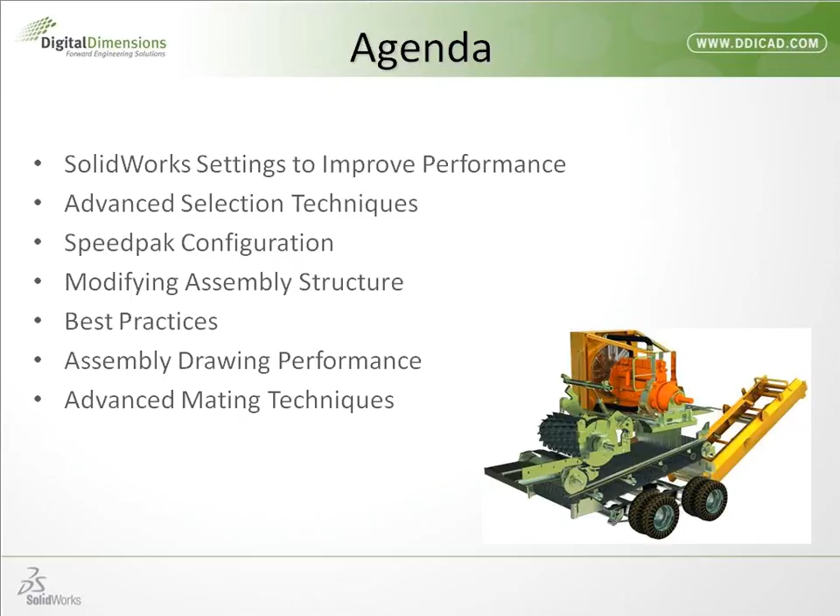So the first thing to kind of have a disclaimer is some of the strategy, some of the things that you're going to see here today are going to work in your environment. Some might not work so well. So it's going to be a combination of settings and some of the techniques I'm going to show you. Some of the stuff like simplified reps, you might have to do some upfront planning and work that out with everybody that's involved here. And one thing is that there's no silver bullet. There's no way to have one thing work for everybody in everybody's environment.

So I'll go ahead and get started with first off going into settings. So settings, some of these might be familiar to you. Some of them might be things that you haven't tried before. The big one is turning on the ability to have lightweight components as part of your assembly. Or another big one is large assembly mode, and then I'll follow up here with the image quality.

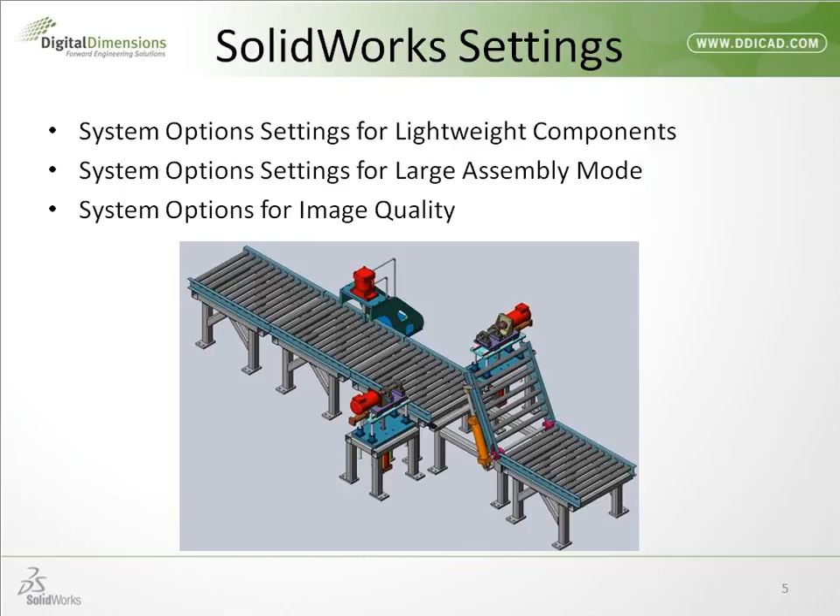So let's first talk about lightweight components. So lightweight components are a way to speed up rebuild time and also speed up the load time when you first open up an assembly. Everybody has different ideas of what a large assembly is, but if you load up something with a couple hundred parts versus a couple thousand parts, using lightweight components might make a big difference.

Lightweight components can be brought up two ways. You can change something in the settings, or you can just select something directly when you go into the File Open dialog box. And I show here on the slide under System Options, Performance is where you can turn on that automatically load components lightweight.

Now the lightweight components do show up with an icon showing a little blue feather, and you might see a red feather once in a while. It means something's out of date, but a blue feather means something's in lightweight mode, which means it's going to have all the capability that you're used to, except you can see on the bottom of this slide it says things cannot be edited, or it does not show the features in the feature tree when you first bring it up in lightweight. That doesn't mean that you can't just click on the part and then start to actually edit it. So let me go ahead and show you that.

So two ways to bring up lightweight components. I'm going to start with opening something that's in one of our classes here. It's a scuba breathing mechanism. So here if I single click on this air source, one thing you can see on the bottom of my screen here is the lightweight button. So I'll go ahead and use lightweight, and I'll go ahead and say open, and I haven't set the settings up in my options, so this way I'm just directly picking lightweight.

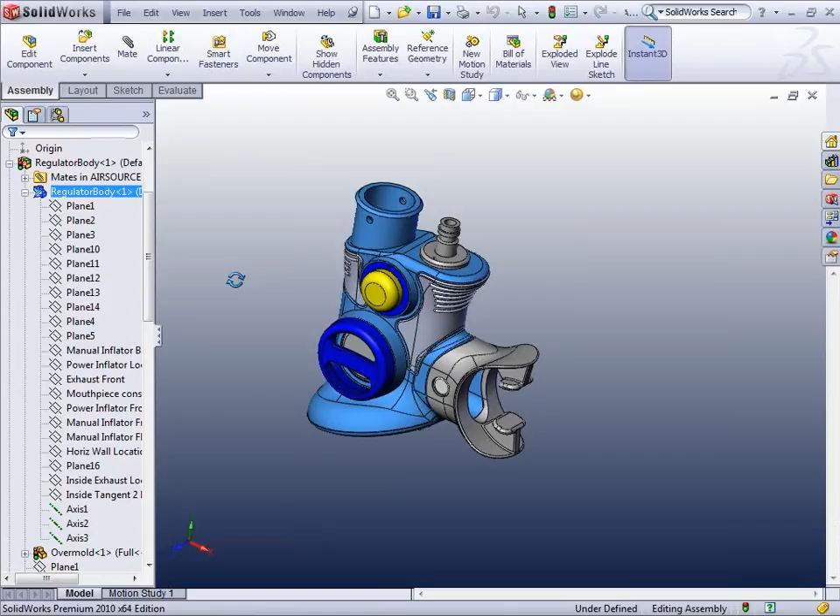The second I double click on this to attempt to modify it, all of a sudden it switches over from lightweight. It adds more data to memory, so it adds information as it needs it. So you can see now my feature tree comes back. So lightweight is a way to speed up the loading process and also the rebuild process, so it'll rebuild quicker because it doesn't have to resolve all of the features that are in that particular part. So again, you can see the blue and you see those feathers.

Now, the opposite of lightweight is resolved. So how you can resolve all these, if you had to get all that information, is I right click here and I can say set lightweight to resolved. So when I click on this, it's going to take a little time; it might need to rebuild, like it just said. And also it's going to create the feature tree and put all the features in for each individual part in here, so I can expand them out now.

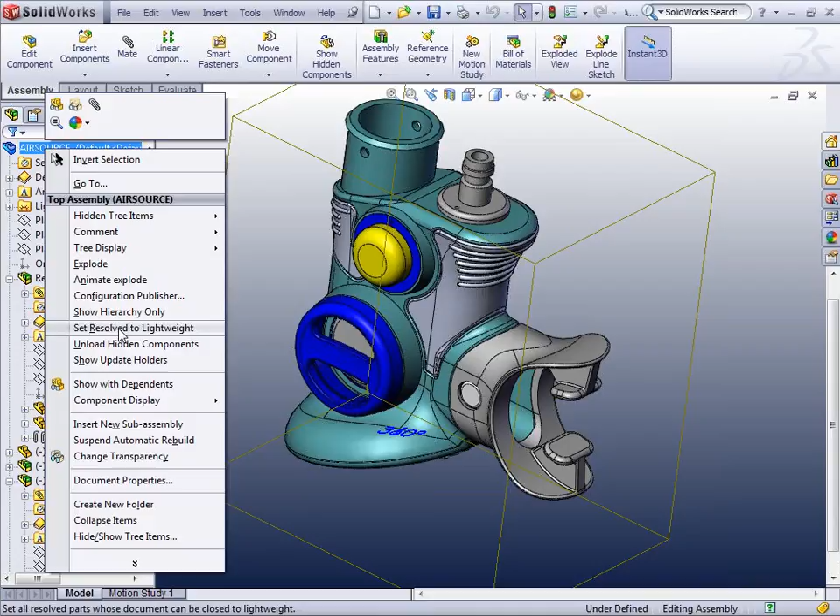And again, if you wanted to go back the other way, you can go in here and say set resolved to lightweight. So there's 4 ways a part can be in SolidWorks, 4 different states. It could be resolved. Fully resolved is the opposite of lightweight. It can also be hidden, or it can be suppressed. So those are the 4 different states.

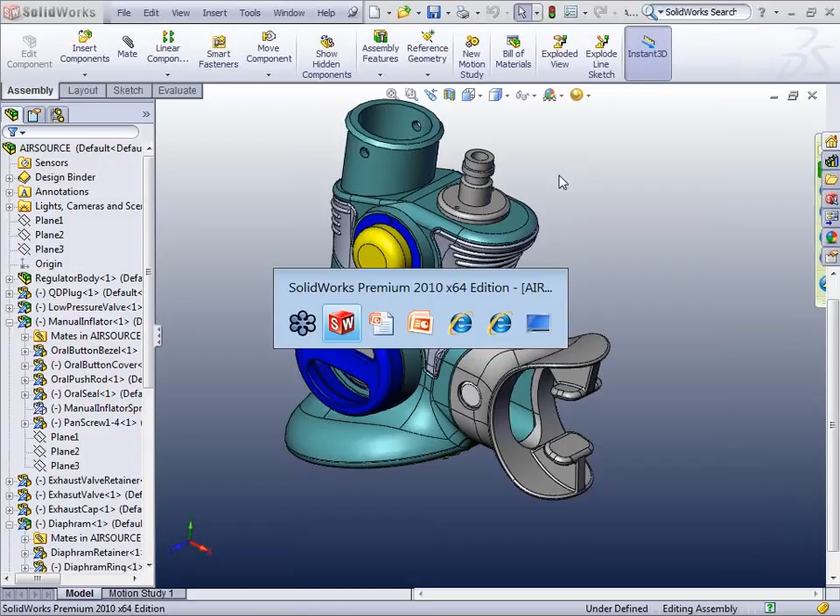So in this case, I just made those all back to lightweight. So it does speed up rebuild time. It does speed up load time. Let me go ahead and show you that again. Now the other way to bring up lightweight components is by setting it under the system options. So here's system options, performance, automatically load components lightweight. So let me show you that.

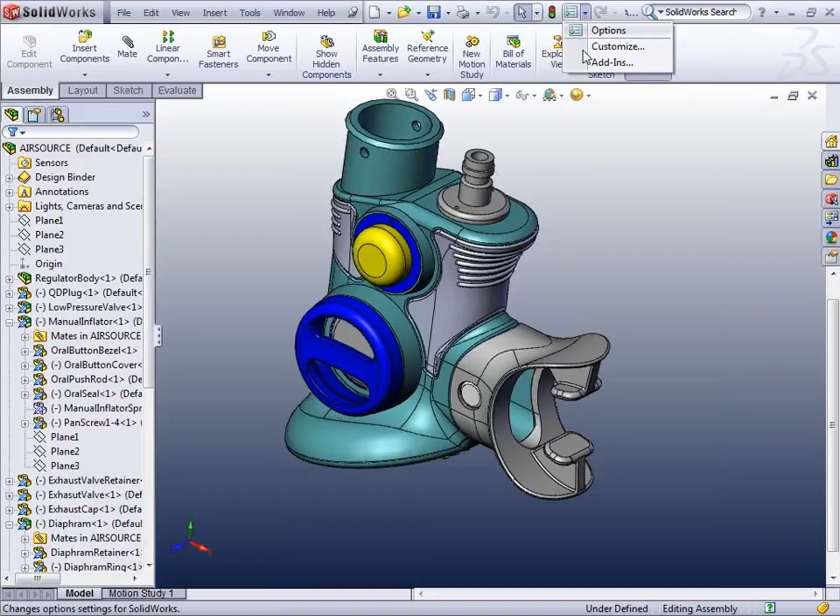So under tools, options is one way to get to it, or some of you might be familiar with, right next to the rebuild button, is options here too. So if I go into tools, options, system options, performance, here is automatically load components lightweight. So there's lots of settings here. The one that you want to also be aware of is you want to leave this always resolve sub-assemblies checked off. There's some other settings like check if things are out of date.

Here, resolve lightweight components. And usually here, rebuild on assembly, rebuild on load. This is something that you may have to try out, but if you know you don't want to rebuild when it first loads up, then you can always set that here too. Lots of different settings, and we'll just focus in on this one for here. So automatically load components lightweight. So I'm going to go ahead and say OK.

Now I go ahead and bring up this assembly again. What I'll see is when I go to open, the second I pick on here, that lightweight button is checked off. The other way I can tell is that if I already had opened this up once and I just double click on it, it's going to try to bring it up in lightweight mode here. So we'll let it load up. So you can see that in this case that setting was automatically turned on. So lightweight again saves you rebuild time, saves you load time. So that's one of the things I wanted to point out to you.

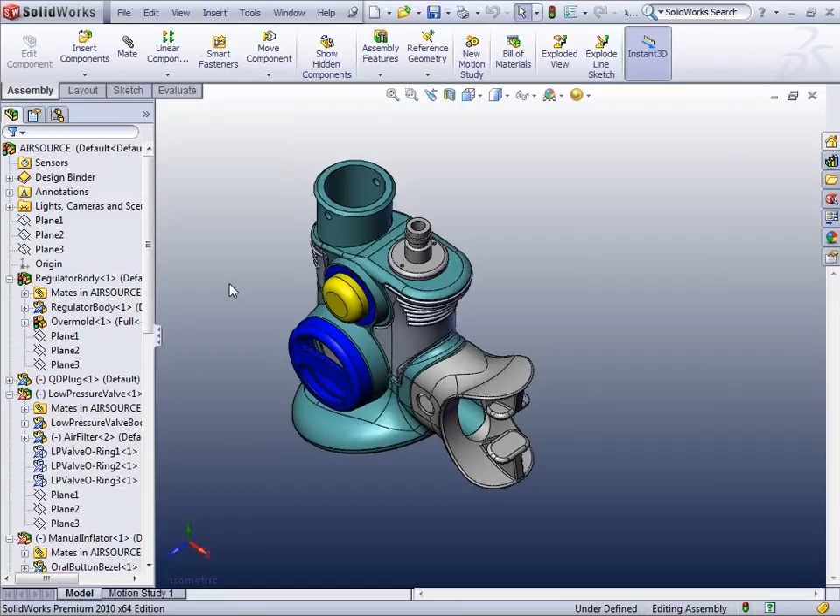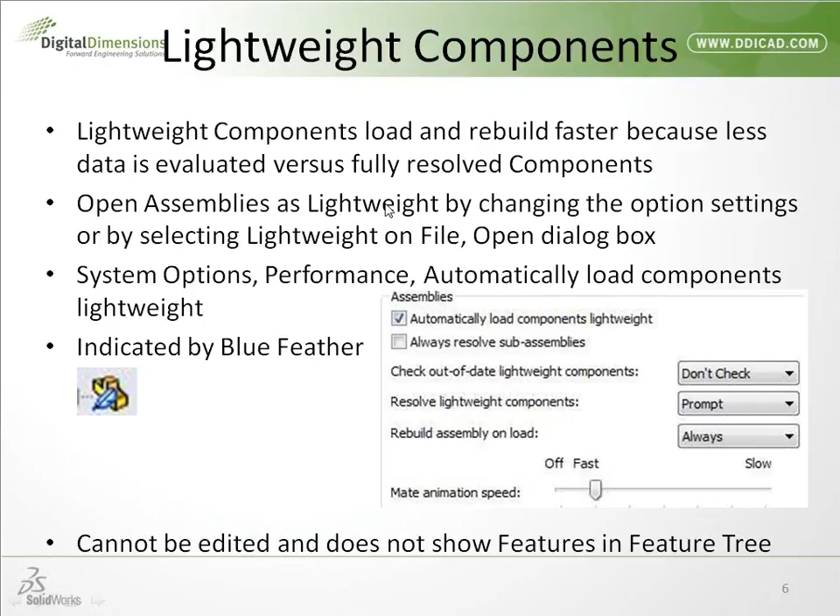So I'm going to go ahead and go back to the slides. Okay, so that was lightweight components. Now I'm going to show you another setting that has to do with some display options, but also has to do with things like auto recovery. The first thing is you can invoke large assembly mode manually. You can manually toggle a button, and I'll show you that.

But you also have the ability to determine if large assembly mode starts up by a default threshold. In this case, the default is 500. We can set this to less in our case, so I can show you some examples. So you have 4 options. You have, if you want the large assembly mode to save an auto recover info file, which a lot of people probably don't have a lot of success using auto recover, so that probably wouldn't be a big deal.

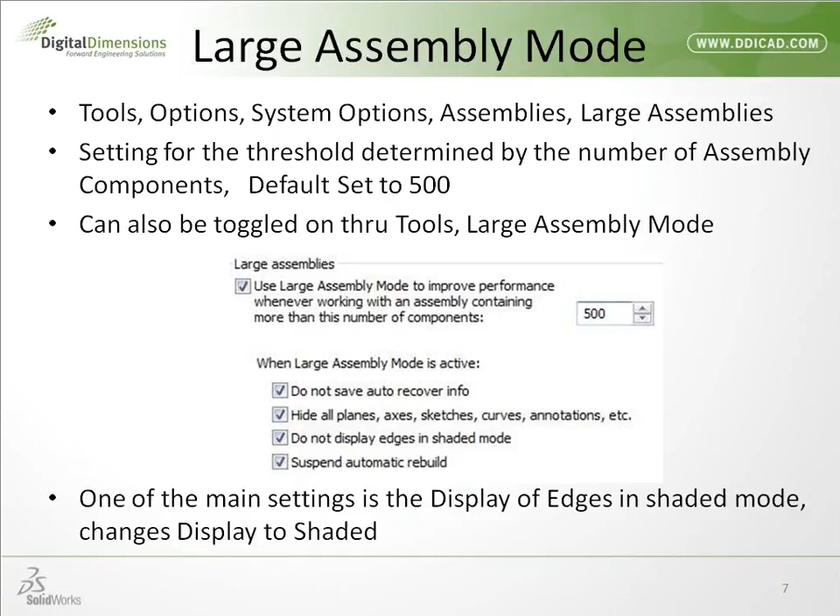Before I go back to SolidWorks, let me just explain that again. So the display style does affect the performance. Shaded is the fastest display mode in SolidWorks. And once again, large assembly mode will push it over to shaded versus shaded with edges. Hidden line visible is the slowest display style. And display style performance also applies to assembly drawings. If I have a little bit of time at the end, I'll show you that. So let's go over large assembly mode next.

So I'll go ahead and I'll close this one out. Now, under Tools, Options, how you turn on large assembly mode is you go underneath Performance; the next one down is Assemblies. And you can see that here is large assembly mode. Now I had triggered this to be, in this case, 3 components, which is a little bit too low of a threshold. So this is going to set, if it's a 501 part assembly, then it turns on this large assembly mode automatically.

Too high so it doesn't invoke it. So you can see all these settings are configurable. The 2 big ones that you'll see right off the bat are these ones for display and showing all the planes and axis and stuff like that. So in this case, I'm going to turn them all on. And this is something that you can experiment with. Once again, some of these things you may not be able to live with, so you might have a combination of these 2 or 4. So I'll go ahead and say OK.

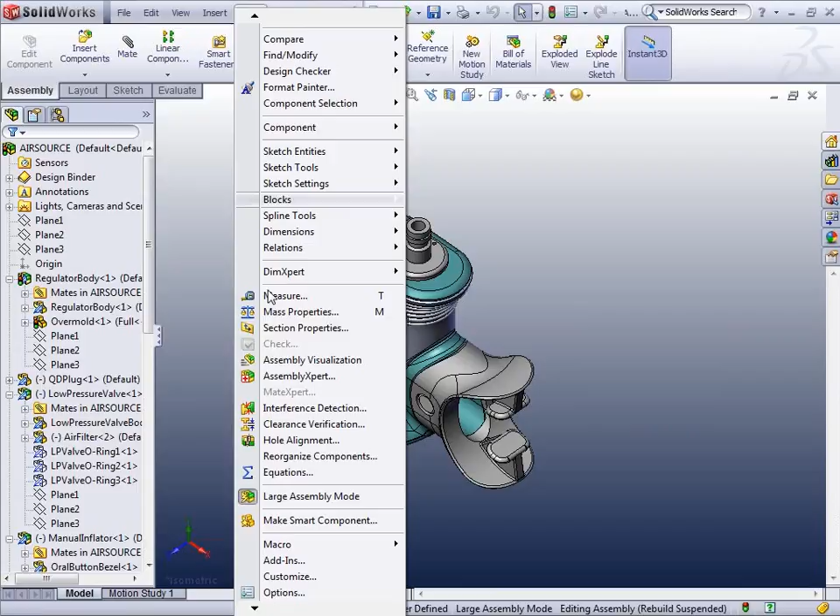with large assembly mode. So I'm going to go ahead and say open, and now it's going to invoke this large assembly mode. It will help to speed up some of the process. Here under Tools, you can see that large assembly button was pushed in. So you can see when that large assembly button is turned on, the biggest thing you'll notice is that shaded goes, and I just forced it.

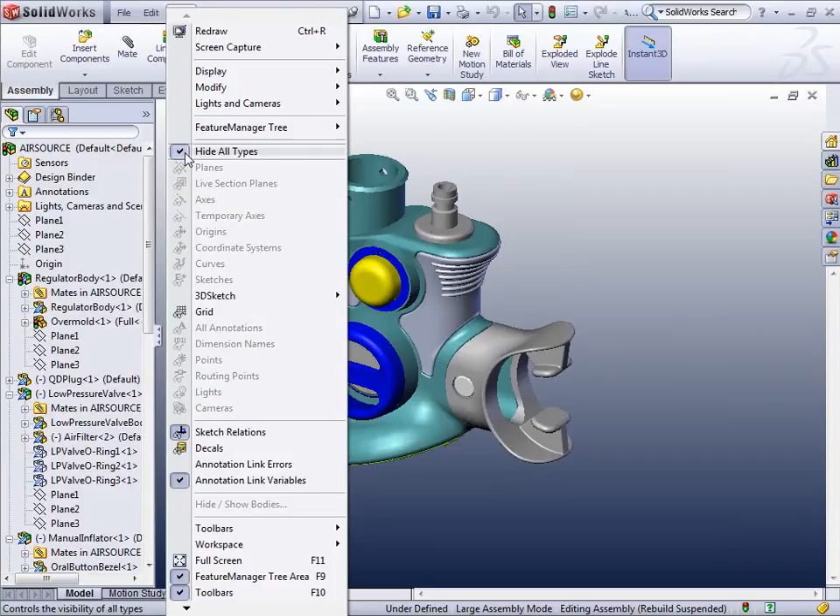So here, when I go large assembly mode, you can see the shaded edges go away and it goes to shaded. And then the other thing you'll notice right away is that hide all types is checked here. It says basically all these are closed and the hide all types is checked. So you can toggle in and out of this mode here directly. Tools, large assembly mode. You can see you can toggle that on. So you can come in here and you can turn back on things like your planes and whatever you need to do here. And you can go to different display styles.

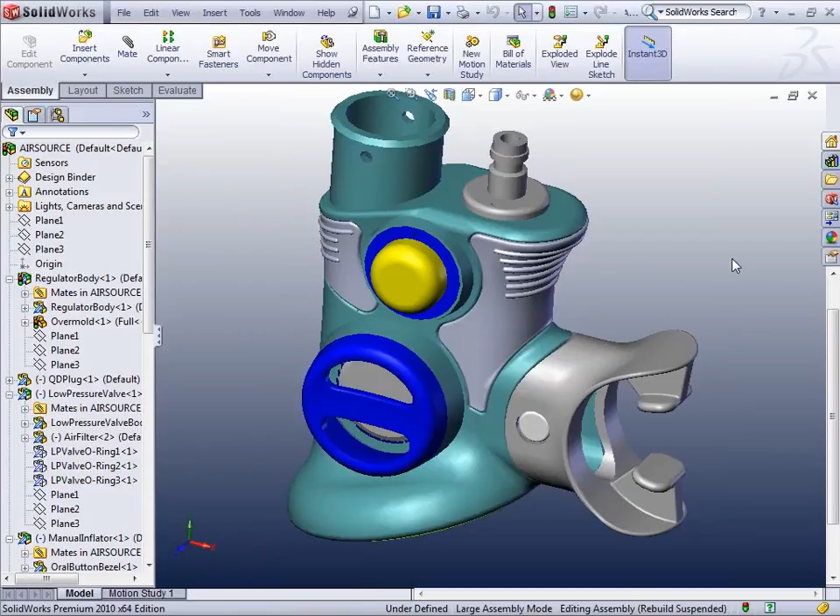And then if you wanted to turn that back on, these are quick fixes here. These are things that you can do right away. And this might be good enough for you to bring up a big assembly on a computer that doesn't have a lot of RAM or a lot of resources. So that's one of the other things I wanted to show you there. Now let's go ahead and move on. So I'll go back to my slides.

So again, this is going to be under Tools, Options, and now I'm going to go into, in this case, Document Properties, and here's Image Quality. Now, sometimes when people go into here, this thing is grayed out and they can't move it around, and we get calls on that. Now you go ahead and say Apply to all referenced part documents. So anything that's open is going to have this affected.

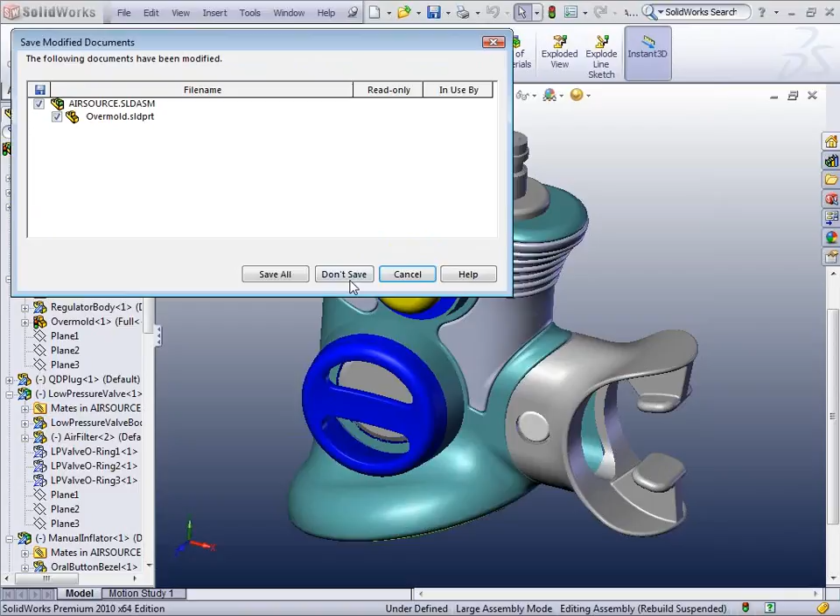So what I'm going to do next is I'm going to open up a different assembly now. And this assembly is one from one of our training courses, in this case Advanced Assembly Modeling. And so this is a barbecue assembly. Now what you want to know is that you can see all these settings down here, and there's all these options that most people don't pay attention to, and this is a pretty powerful one.

Here is Quick View Selective Open, and so once I click on this, it's going to show my assembly very quickly. It doesn't actually load it all the way into RAM. So it goes in here and it opens this thing up very fast, but it's a little deceptive. It's actually not fully loaded in RAM, which is okay because I can at least look at it.

Now, sometimes people use this if they have trouble bringing up an assembly, either because of resources or the assembly doesn't come up. So you can actually bring this up and suppress things enough to where the assembly still comes up. So here you have two options: selected components, and you also have all components displayed. Now this is really cool because if I click on this, I can see all components displayed. I have all this stuff open right now.

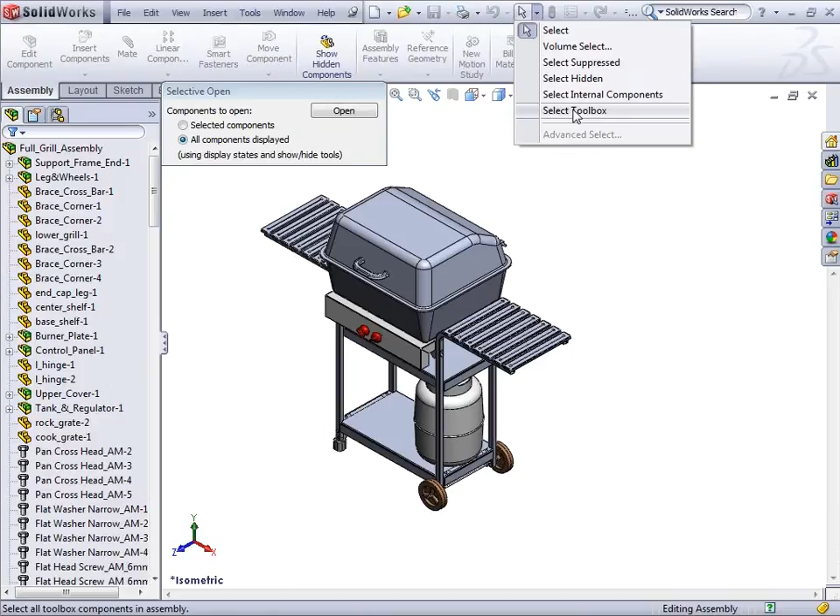But here is something called the Advanced Select. Most people probably don't use this button up here. It's right next to the rebuild. If I click on this, in this case, I'm going to select the toolbox parts, and it's going to find the toolbox parts, and you can see they're highlighting in green on my screen. I can go ahead and right click, hide those components. Now I just hid those.

I still haven't opened this assembly up in RAM yet, so now I can say open everything that is displayed. So that means in this case, turn off all these fasteners and only show me the main part of the assembly minus the fasteners. So go ahead and say open.

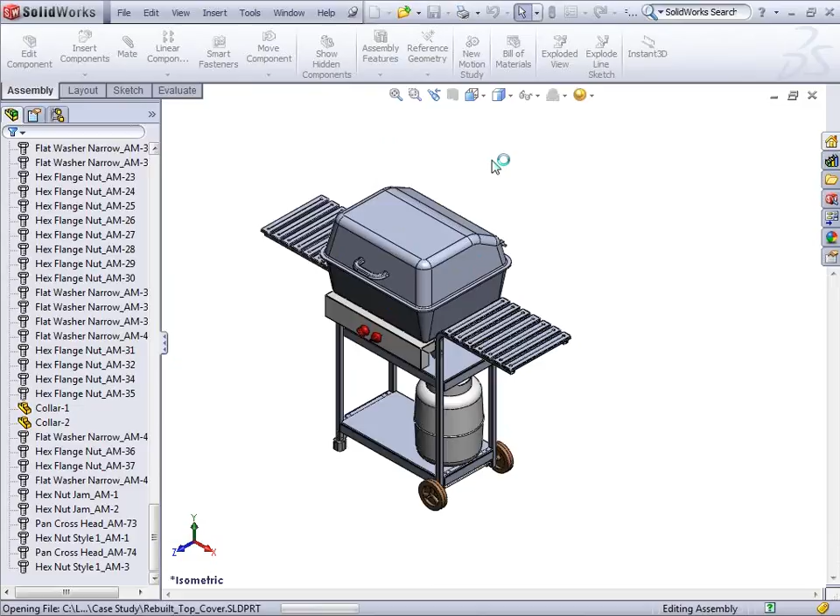And so you'll see it's going to open up basically a subset of my assembly minus the fasteners. It's asking me here, in this case it's telling me you have some hidden components. There's going to be a delay when you first try to show those components.

It's just a warning, giving me a heads up. So now what happened here is the assembly has all these components, in this case the fasteners, hidden. Let me show you what it did - it made a new display state. I'm going to toggle back and forth between the assembly to get the display states to wake up here, since they sometimes don't show.

So here you can see the components, I'll zoom in here again. So you can see I have a display state down here, and I'm going to rename this one. I'm going to call it 'no hardware' - no hardware, no fasteners, something like that that makes sense.

So now it created a display state, which you can see I'm in the configuration tab. This is a graphical configuration, a quick way to explain display states. So in this case, you're not suppressing components, you're actually hiding them.

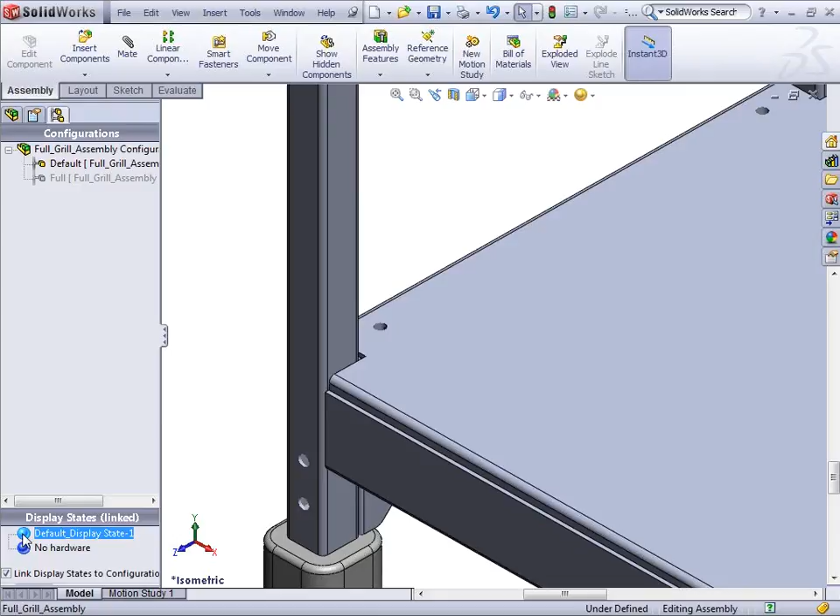So here is the default display state, so you can see those fasteners, and then here is the no hardware display state - that automatically created that. Here you can see the fasteners again when I go to that display state. So this is a quick way to show these fasteners on and off, and a quick way to actually bring up your assembly without having to load up the whole thing.

So again, where that was is it was under open, and here is quick view here. So now the next step is going to be...

Slides here. So the next thing I'm going to show you is Speedpak. I'm going to show you a Speedpak configuration. Speedpak configurations are new for 2009. They added a little bit more functionality in 2010. A Speedpak configuration is a special configuration which you can think of as a simplified version.

In this case I'm going to show you an assembly. It's going to still maintain its references, so if you mated things to it, the mates don't get broken, you don't get errors and warnings on your mates. And you have two ways you can simplify these configurations, either by face or by bodies, to include or to leave out.

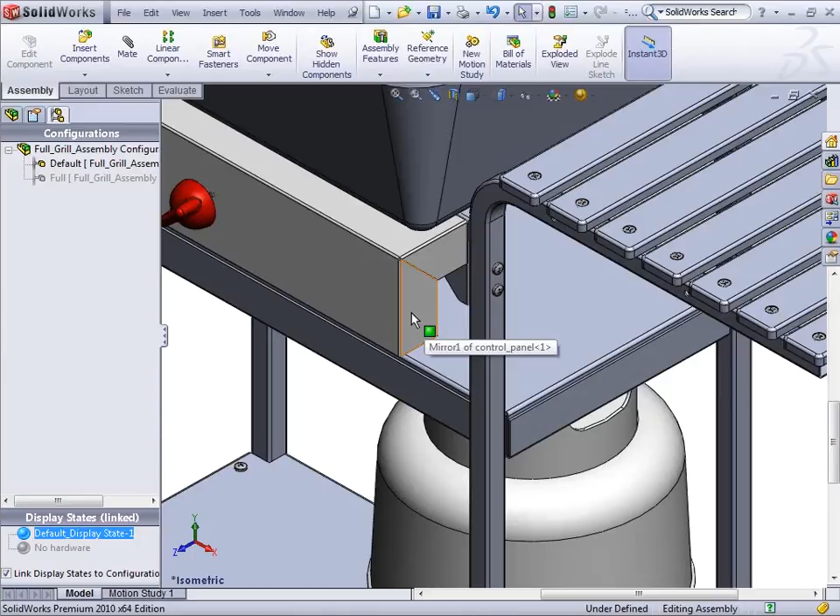Alright, so what I'm going to do is use the same barbecue assembly here. I'm going to go back to the full assembly here, and I have a couple different configs. This one has, instead of just the planks, it actually has some burners. I'm going to show you a couple different things here.

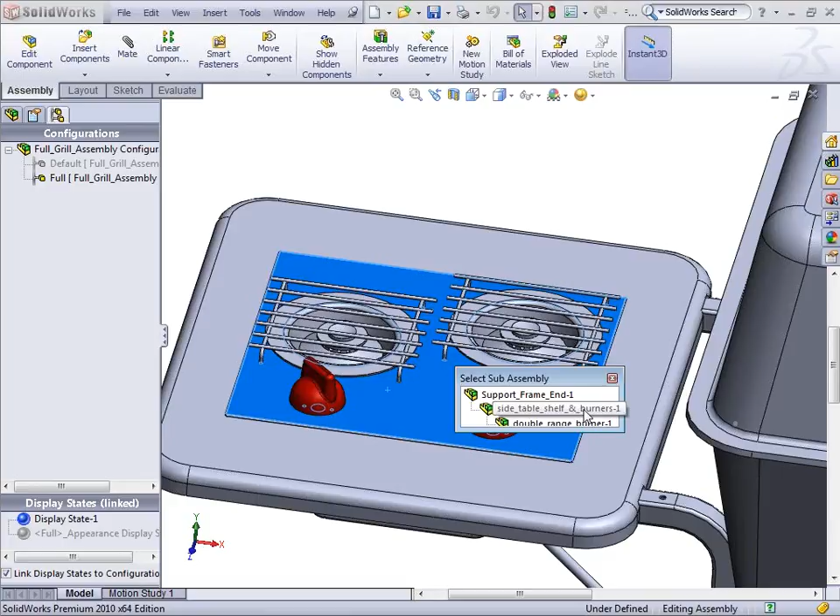One little trick that you might not know is when you right click, you can actually say select a sub-assembly, and it's going to open a window with these different things I might have been trying to pick. In this case I have the side table shelf burner, and another sub-assembly. I can right click on this and I just want to show you the component properties. Right now I don't have any configs except for the default one.

Now I'm going to go ahead and go over to the configuration manager, and this is where I'm going to add the Speedpak configuration.

It's not that much, there's not that much magic, or much difference on the interface. I'll show you the selections here in a minute. That's the only difference that you'll see.

Here's add configuration. The next one down is add SpeedPak. So once I add a SpeedPak, you have different settings, and some of these things are still getting ironed out.

There's a way to use the slider bars to pick faces and bodies, but I'm just going to manually pick them. So here's faces to include, here's bodies to include.

What I'm going to do is dummy down this and basically simplify this assembly to only pick a few selectable faces for mating purposes. I want people to still be able to mate to this assembly or sub-assembly, but I don't want all the overhead of the features having to be resolved during rebuild and stuff like that.

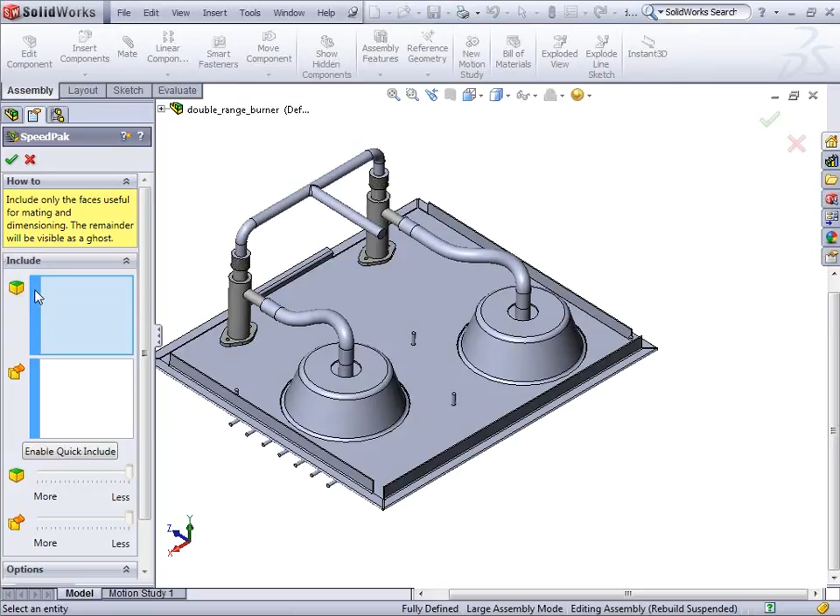So I have two options here, faces to include and bodies to include. I'll go ahead and go with faces, and pick. In this case I'm going to pick 3 or 4 faces. I'm basically giving people the option to mate to these faces here. I'll put in here, I got 5 faces.

As soon as I say okay, this is where you'll see it, and some people kind of get blown away when they first see this. You can see that now this is what the SpeedPak looks like. It basically turns this into 5 selectable faces.

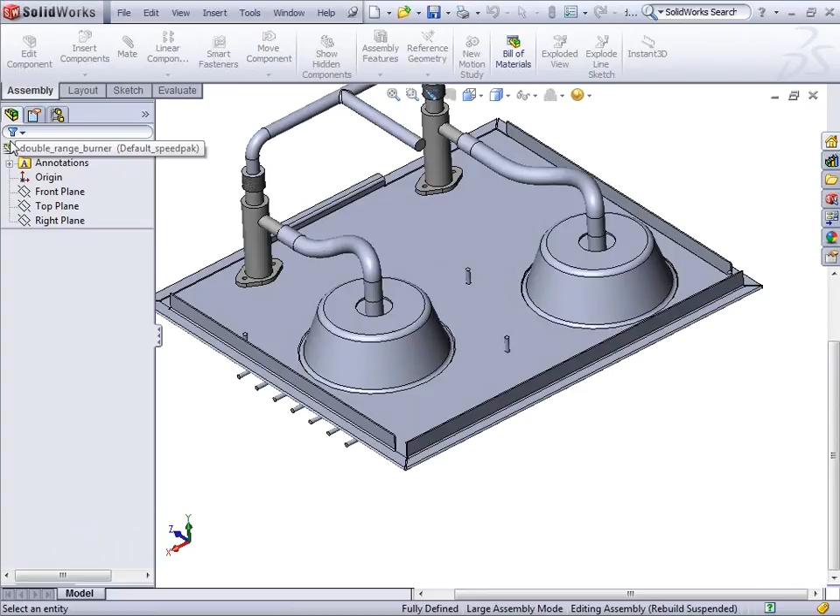So there's 2 configs here. Here's the default one, and here's that SpeedPak one. You can see that when I go back to the feature tree on the SpeedPak, there's not much in here, it's just basically those components. I'll go back to the assembly.

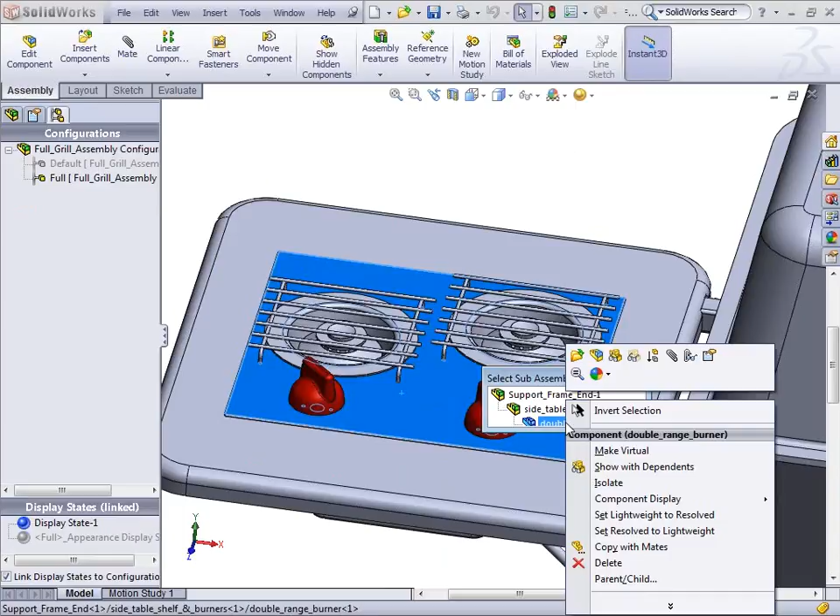Here's that same trick I did before. I'm going to say select subassembly, and now here on the bottom is double range burner. I'm going to right click on it, and I showed you this before, the component properties. If you haven't gone into this window much, component properties has a lot of good things. First off, the one I'm going to change is I'm going to go ahead and go to that SpeedPak configuration.

If you ever have a subassembly that has movement and motion and hinges and stuff that should be able to move, and it doesn't move when you bring it into another assembly, it probably took it from a flexible assembly to what they call a rigid subassembly. So that might be something that you have to change too. I changed it over to a default SpeedPak.

The next thing I'm going to show is once I turn that configuration on, then when I move my mouse over it, it basically dummies that down to, in this case, those selectable faces. I'm going to hide this component here so you can see this better. Now you can see those 5 faces that I picked are the only thing you can select.

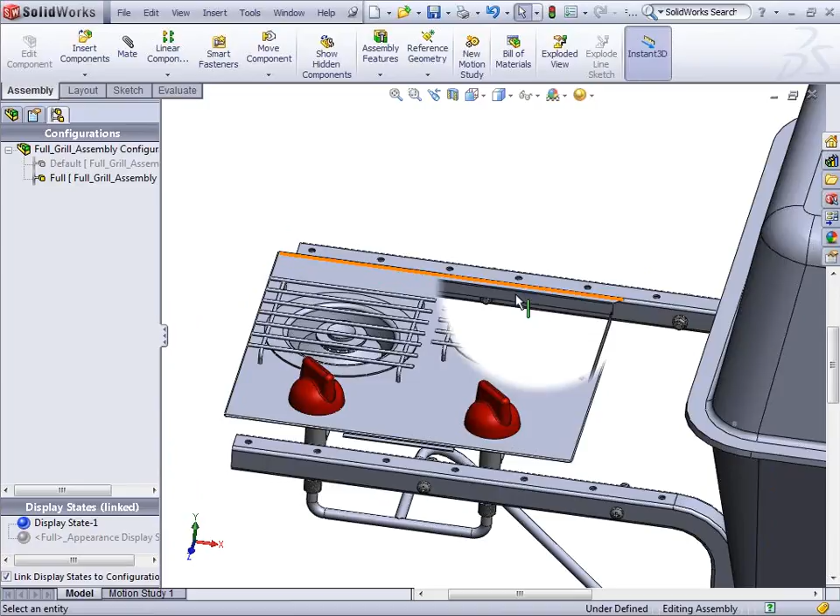So now if I want to mate, I can pick that face there and mate to it, and mate something else to it, so you get the idea. This is a way to simplify your assembly, in this case your sub-assembly.

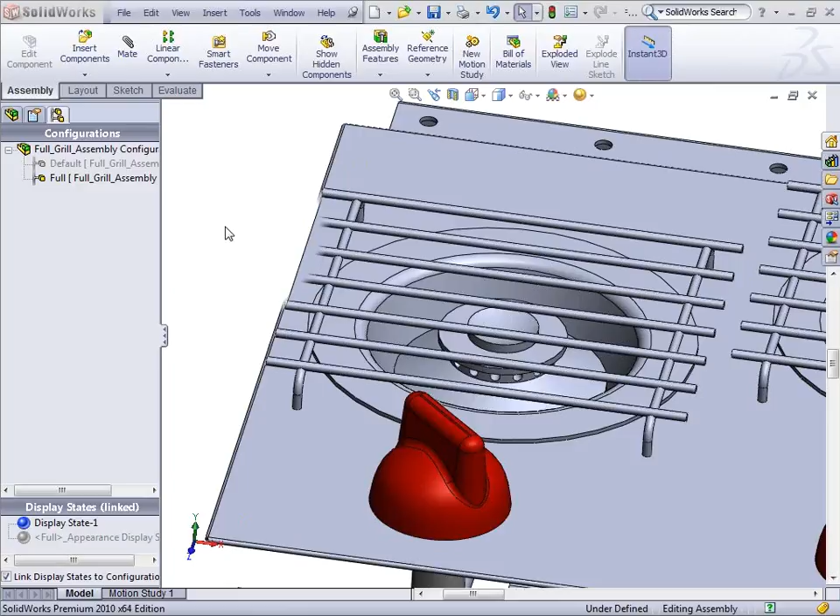Now we're going to start getting to some real good stuff. I think some of you will really think is pretty good. I'm going to show you something called Simplified Configurations, and also use a tool called Advanced Open.

When we talk about some of these techniques, settings are easy to turn on and off. Some of these things I'm going to show you now in the simplified configuration, you might have to do a little bit of planning, and if you're working with multiple people in your office, you might have to get this stuff straight on what you want to call your configurations. In this case, we're going to call it a simplified configuration.

That simplified config is going to have, in this case, some of the detailed features turned off. Small holes, fillets, chamfers, have those things turned off, because those will help. If they're turned off, first load up your model, it'll load faster and rebuild faster.

So simplified configs can be created manually, or there's a simplify command that's available under tools, find, modify. It is a utility, so it's going to be available for people that have Pro and Premium, but I'll show you the manual way to do it too. Fillets and chamfers are the easiest features to suppress.

When you're suppressing things, you want to be careful because you don't want to suppress things that will affect mates. Also, don't suppress things that you might need for interference detection. So that's something to look at too. Avoid mating faces and features that will be suppressed, because you don't want your mates to fail.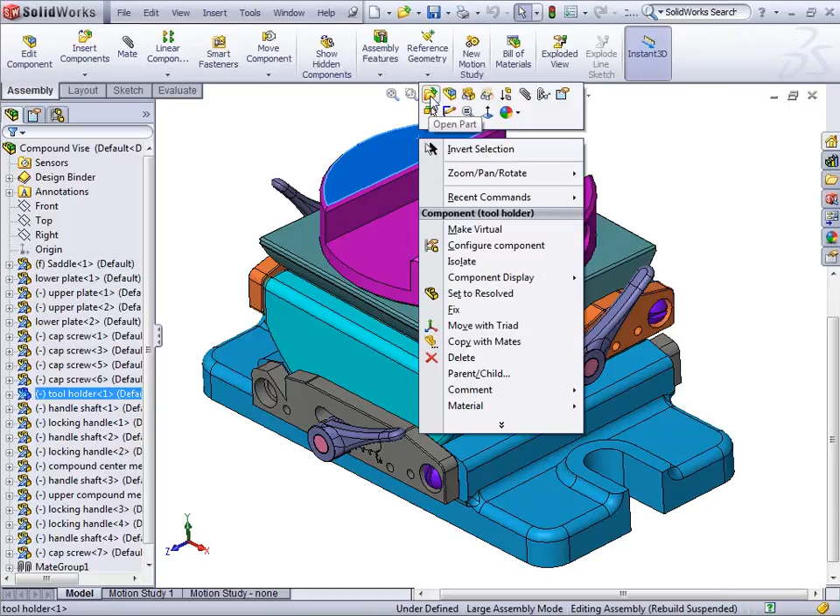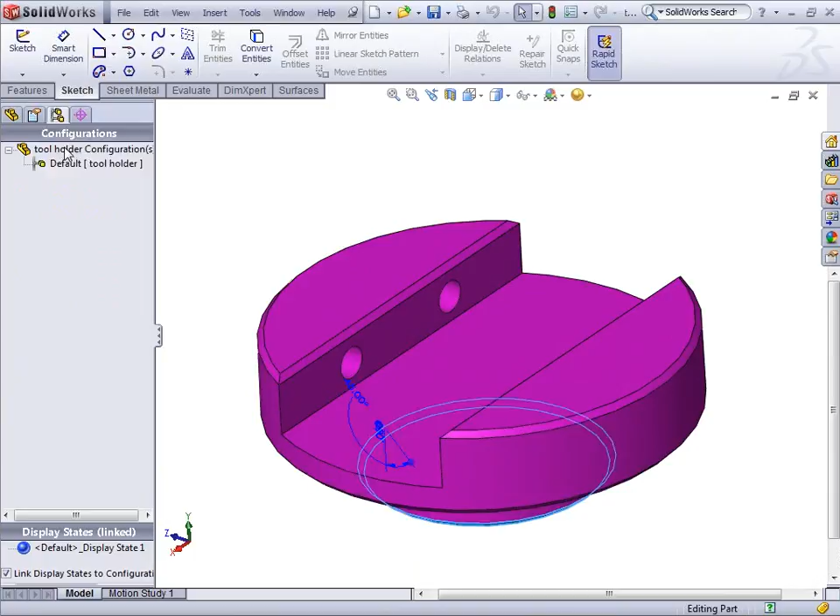This part has a couple fillets, or in this case some chamfers. The only gotcha with these chamfers is making sure nothing is mated to them. This is something you'd have to test and make sure it works okay for you. If you're working with other people, make sure everyone's on the same page, and that you're not mating things to fillets, chamfers, and faces like that. So I'm going to go ahead and create a configuration called Simplified.

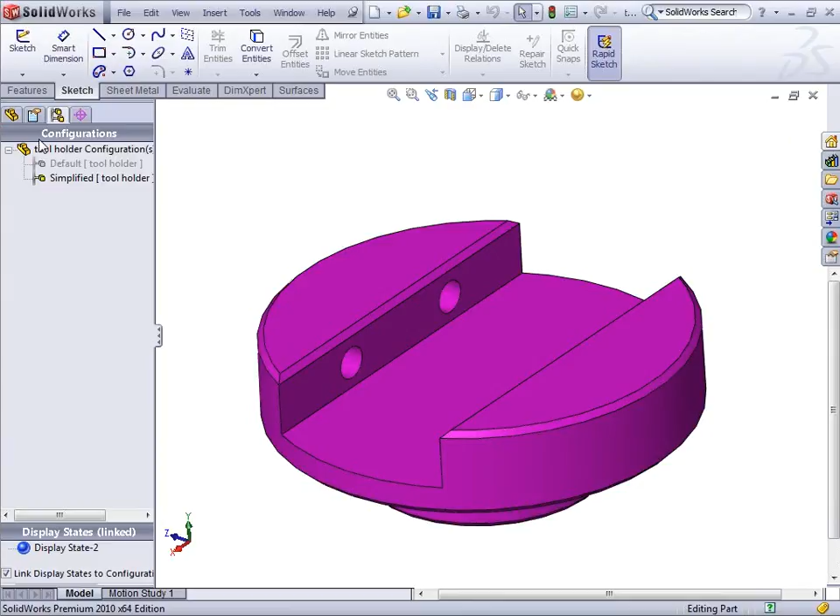I think it's not case sensitive, so you can have an uppercase S or not. So I'm making a simplified config. This is something that, if you're working with the core version of SOLIDWORKS, you might have to do manually. So I just made a simplified config of this part, I just took the chamfers out. Now I'll go ahead and save this and go back to the assembly.

This other part's a little more exciting. I'll go ahead and open up this one. This one has a bunch of fillets and some small holes. I'll make a simplified config of this one too, making sure I spell it right: simplified.

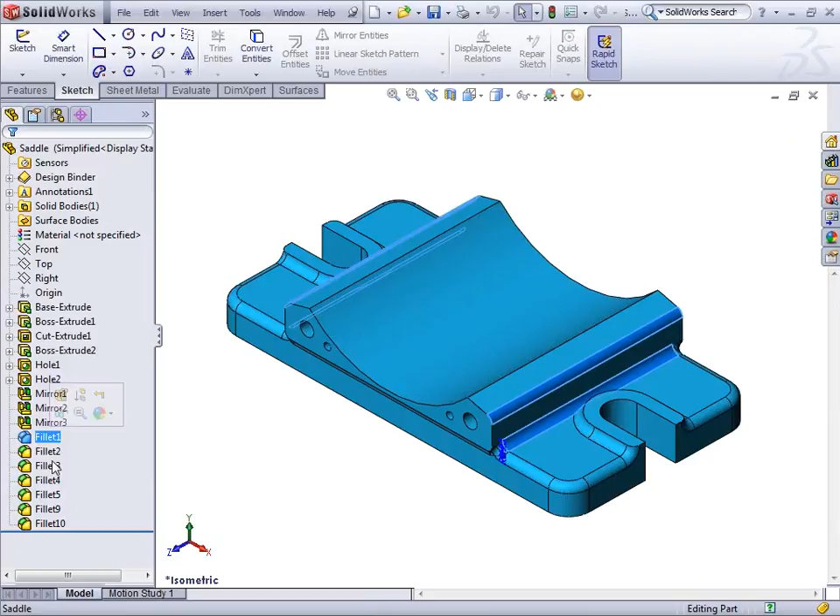So I'm going to make sure I'm in that simplified config, and I'll shift-select all these and suppress those. Maybe I'll also suppress this small hole here. These other holes, maybe I could put those into this config too. So this is what it looks like now, I have the default config and the simplified config. I'm going to go ahead and save that.

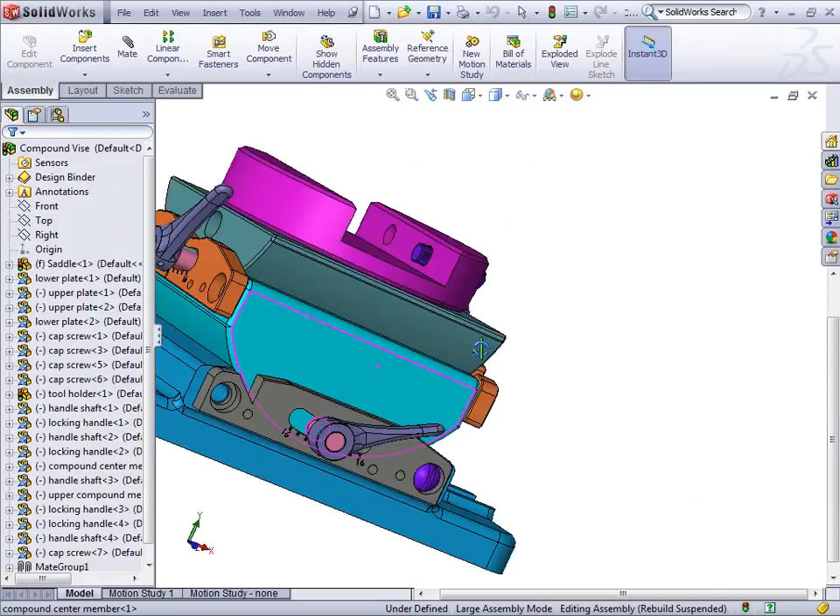I'll go back to the assembly, and you can see it hasn't done anything yet to affect those. I can make a config right now, but instead I'm going to close this out, close all these parts out, and then open them up again.

Now there is this advanced open button, and this advanced open button is going to search the whole assembly, and anytime it finds a part that has a configuration name, in this case simplified, it's going to bring that up and use that one. So you can see that this would definitely help with load time and not using up so much RAM, because if it doesn't have to resolve those extra features, it's going to load it up quicker.

I'll go ahead and show you this. So now when I go back into SOLIDWORKS, I'm going to say file open, and the biggest gotcha with everything is just don't double click on the assembly. Click on it once, and I'm going to go ahead and turn off large assembly mode. And if I go over to advanced here, that's the trick. If you double clicked on this, you wouldn't get to that advanced button.

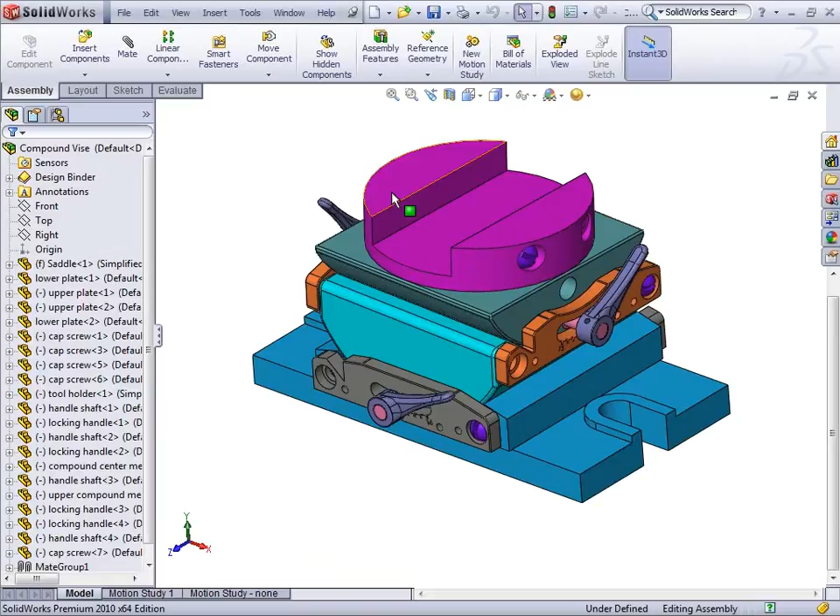And now you can see that this part came in without the two chamfers, and this part over here came in without those additional features. So if I wanted to actually show those, I just go over to component properties, and I can always bring it back. And the same with this one, go to component properties and bring back the default one.

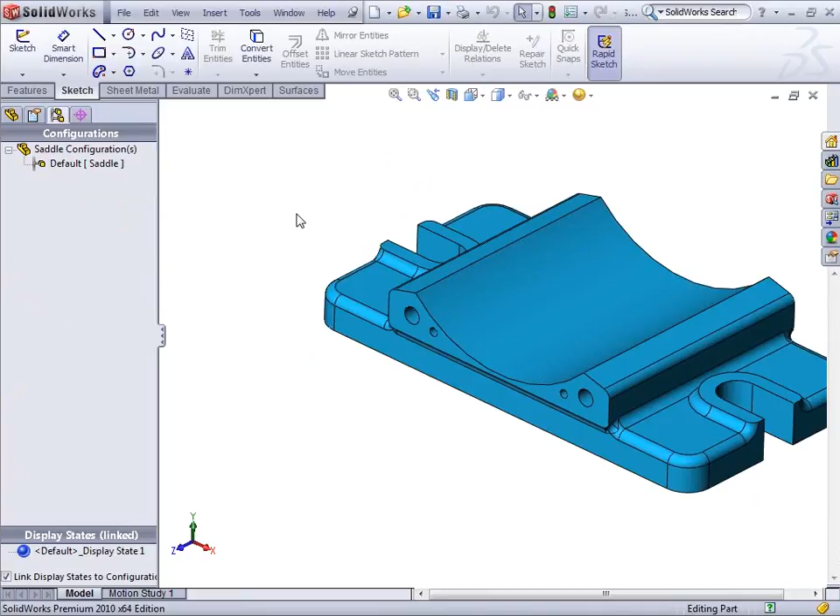Now I'm going to show you an automated way of doing this. So I'll go ahead and just get rid of that one here and save this part, so I can go back to where it didn't have a simplified config. And same thing with this part. I'm going to go ahead and delete that one, and save that one. Close that one. And save this one and close this.

So now I'm going to show you the automated way of doing this. I'll close this all together. First thing is, this is available if you had Utilities, and Utilities is what we're going to use for the simplify command. Now this is only going to be available for people with Premium and Professional. So I wanted to show you the manual way beforehand so that everybody has the same capability available to them. Now in this case, this is an automated tool, so I'm going to go ahead and say OK here.

So now I'm going to go ahead and open this assembly up using normal methods. I can load it up lightweight, large assembly mode. Now I turned on the SOLIDWORKS Utilities add-in under add-ins. There's a tool under Find Modify. Now it's grayed out, so this is one time where I am going to have to get out of lightweight mode. And how to do that is I'm going to right click here and say set lightweight to resolved.

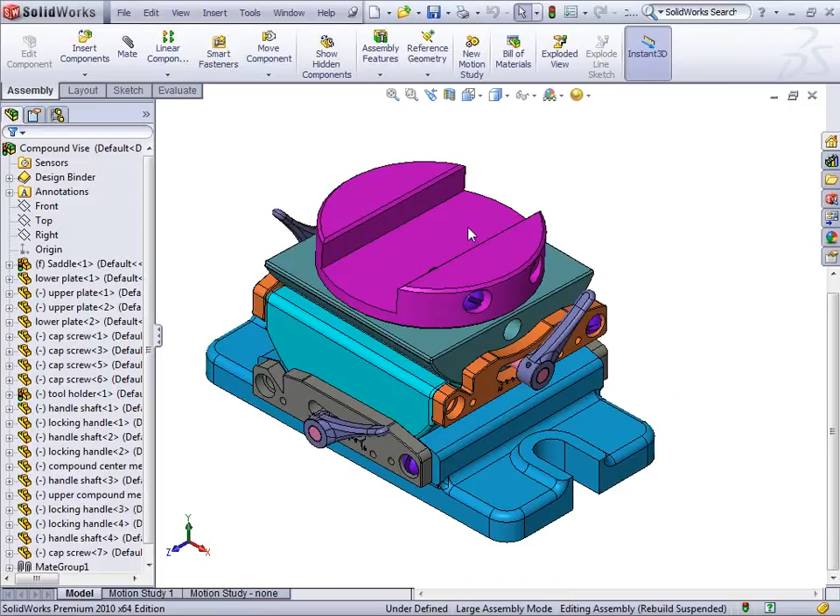It'll take a few seconds here to switch over. Now this is a small assembly. When you do something like that with a larger assembly, this might take 20 seconds or 5 minutes, depending on how many components we're talking about. So now once I go into Tools, Find Modify, here's this Simplify command. Now what's nice is I can actually do this at the assembly level.

So the first thing is what can you do with this Simplify? You can simplify the components based on features or by volume. And here's this button, and I'll slow down here: Ignore features affecting assembly mates. So it has some intelligence. It's going to try to pick up on any faces or features that have been used to make your mates, so it doesn't blow up the mates.

I'm going to go ahead and say okay. The simplification factor, 1 is the highest, 0.1 or 0.01 is the lowest. So you can make this thing go super simple, or just have it simplify a small amount of things. So I'm going to hit the Find Now button, and it's going to find, in this case, I had selected chamfers, fillets, holes, extrudes. If you're worried about some mate problems, you can turn off extrudes or holes.

Now what it did is it found 60 features. If I had this button checked off, it would have found, I think, 80 or more, depending, obviously. In this case, I have tried it without it. I think there were about another 20 or 30 more features. So these are not just for one part. These are for multiple parts. Now down here on the bottom of my screen, you would see this on your screen. I have a lower resolution here.

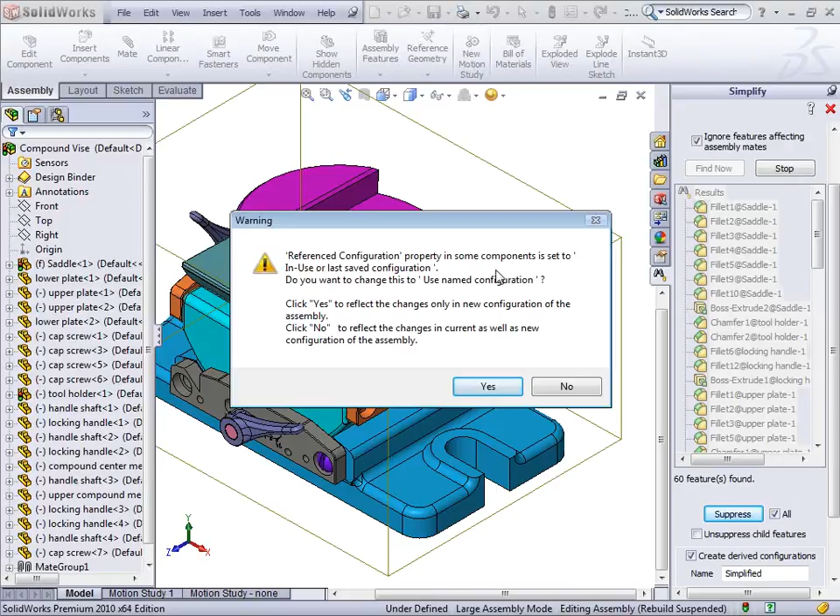I'm going to go ahead and say all the components. I'm going to suppress them all, and it's going to ask me, do I want to set it for only the new config or for all the configs? I'm just going to go ahead and say just modify this for just the new config. Now what it's doing is it's going to create, and I have to get out of this window first to show you, so I'll go ahead and close it out.

So it's going to create a simplified configuration in every single part that it modified, and it also here under the configuration manager created a derived config. So derived means that it's a child of the default one. So when I click on this, you'll see it took me a second to wake up here. Here's the default, and I'll zoom in a little bit so you guys can see this better. So now you can see I have a simplified config and I have a default config.

So when you first open up your assemblies, you can tell it to bring up the simplified configuration. So that is a huge resource saver, time saver, because if you don't have to resolve all these components, individual little features and faces here when it's in a simplified rep, you can see that it can really speed up time here.

So once again, the trick was to use Tools, Find, Modify, Simplify. That's the automated way of doing this. You can do this at the part level too. And then what it does is you can just select that to actually create that derived config.

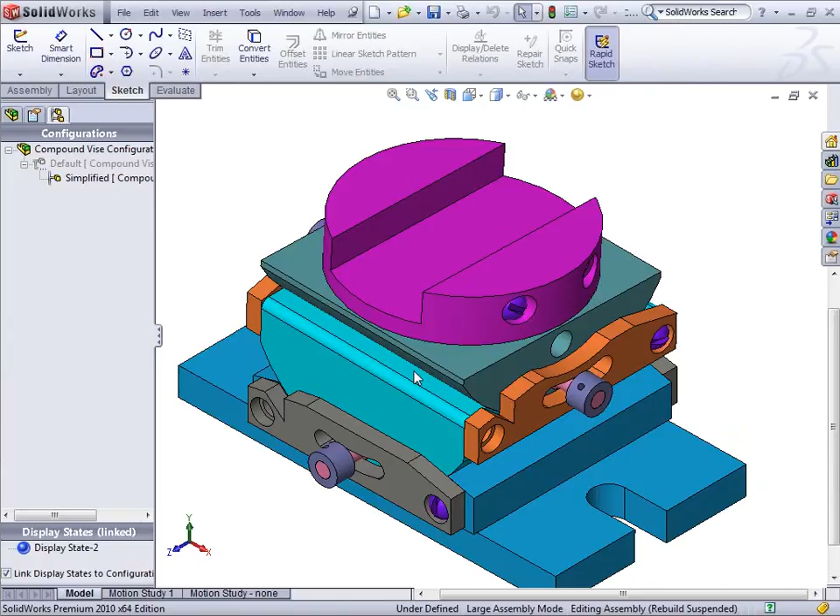So I'm going to go ahead and go back into SOLIDWORKS, and I don't really have a particular example here, so I'll just use this one right here. This is an assembly, so I'm in the compound vise assembly. So what I'm going to do is just go File, Save As, and I can just go ahead and say save as a part, and I'm going to grab all the components. I'll say all components, and in this case, maybe let's put it on the desktop, and I'll just go.

So I'm going to go ahead and save this. You can see I have those different options: exterior face, exterior components, and all components. Now I would only do this step if I knew I absolutely wasn't going to modify this, because you don't want to have multiple versions of these different sub-assemblies and these simplified versions of them as a part.

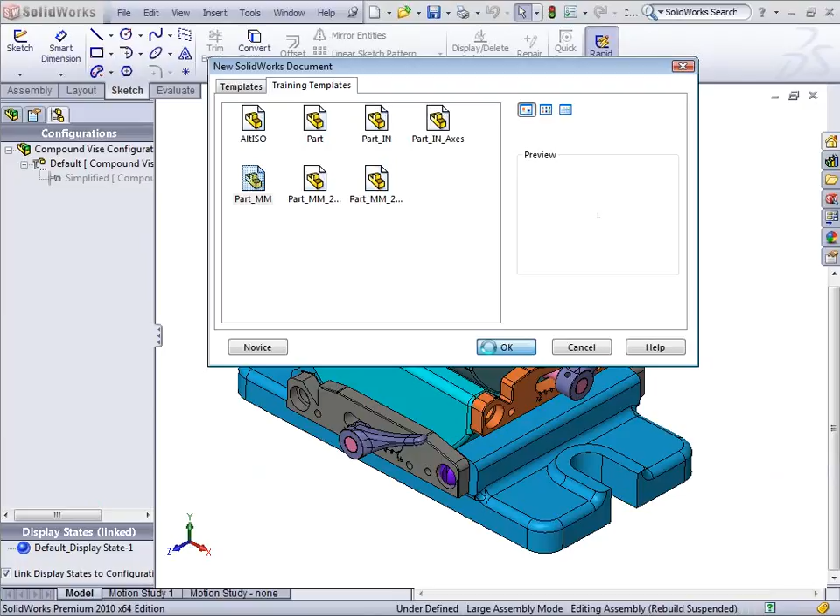So once again, I got there by going File, Save As, and I picked Part. So I'll say this is all components. In this case, I'll save it into a millimeter template. I have my templates so that they prompt me. So I'll go ahead and save this out. I'm going to go ahead and close this model out. And now, if I went to open this model, it is now on my desktop.

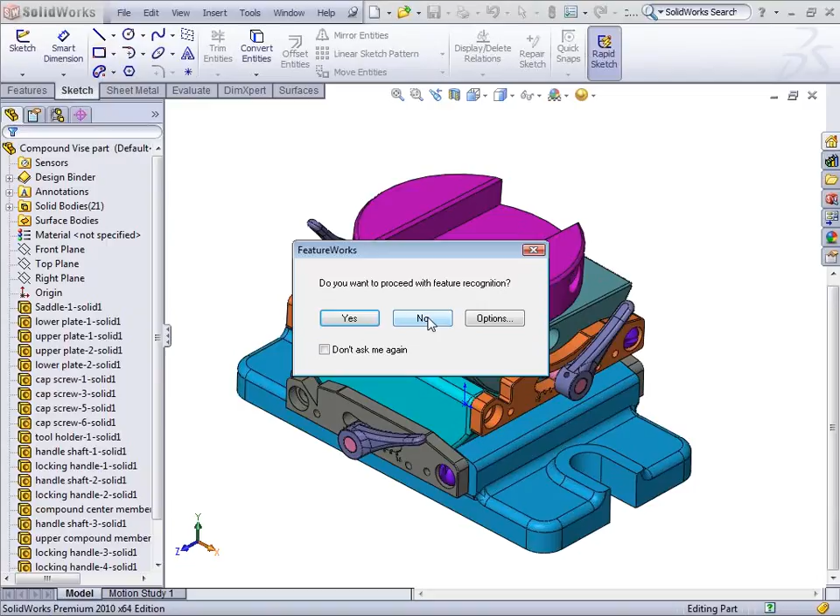And here it is, and it's going to look the same. I can turn on feature recognition. That's one of the utilities. I'll go ahead and say no. Now the difference between what we were just looking at, this is now a part. And if I look up here, you can see it says it is an SLD-PRT file.

So now the only difference between this and what I had before is that these are all solid bodies now. Each component came in as a body. And there's no feature tree now. So this is almost like saving out a part as an IGES or a STEP file. You're dumbing down the model, which will speed up rebuild time and things like that.

Okay, so there's a question. Mike was asking about that auto simplify. How does that affect other important features? So one of the buttons there was checking to see. Let me go back to the tools here. Let me bring up a different assembly. So his question was about the auto simplify. Bring up that assembly so I can answer his question.

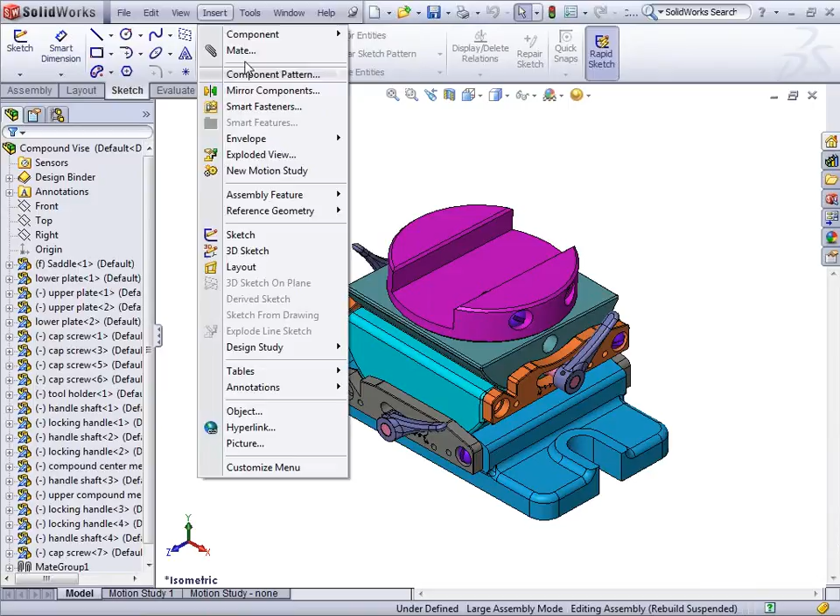So the question again was, when you're using this find, modify, simplify here, and resolve all these. So the question was about this simplify tool. Now, from my first-hand knowledge, this thing is pretty good. There might be some cases where, when you say ignore features affecting assembly mates, it should find, in his case, he's asking, well, what if you did mate to a chamfer?

Well, in this case, you can say ignore features affecting assembly mates, or if you know there's some bad practice going on, you could say, you know what, don't check and don't try to simplify these chamfers. So you can always just turn that off. You can just say, just check for fillets. That would be a pretty safe one. And you can see these other options here.

So if I was real concerned, maybe turn off chamfers and holes. A lot of people do concentric mates to holes, so you can always just leave that one off. So it might just be fillets, but if you're feeling pretty good about that, you can turn them all on, and then you also have the simplification factor. So the smaller you go with this, and let's see here, simplification factor, in both cases volume, and it does give you a little bit of a heads up on what you're looking for.

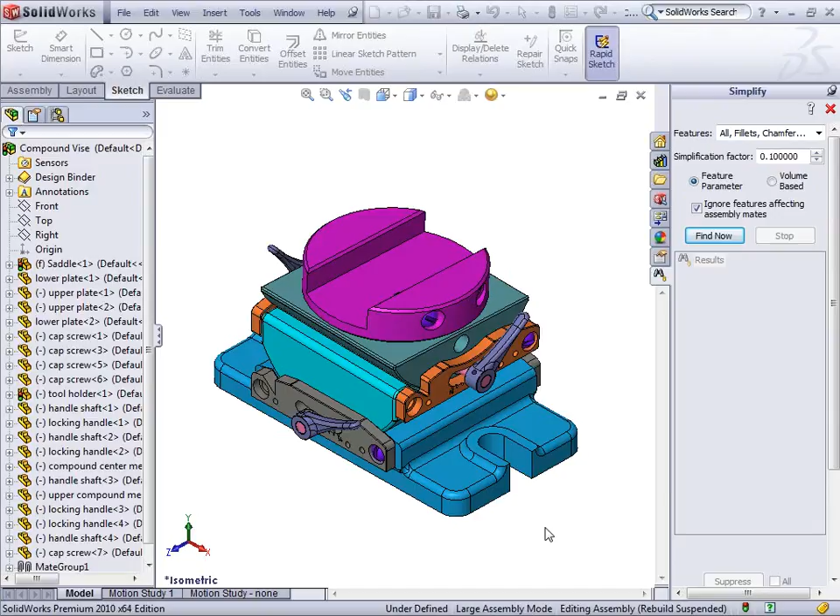You can always knock this down so it only looks for things with smaller volume, or features that aren't going to be affected so much. So that's a good question. I'd say between that and maybe turning off chamfers, that would be a safe way to keep you out of trouble. So once again, another good question. Alright, so now let me go back here.

So now the next one we want to go into is component patterns. I'm going to show you a couple different patterns. With component patterns, you have some feature patterns that show up at the part level. Why not tie into that existing intelligence that you helped put in your 50 holes, and you put them in pretty quickly? Why not use that same pattern to put in the lock washers and the flat washers and fasteners all into that same pattern? So you can tie components to patterns that were created at the part level.

And so I have a cool looking little engine here, and I'll show you these little gold pieces in a minute on how to make a pattern of that. What's nice about the feature driven component patterns is it's going to use less resource because it doesn't have to crunch the numbers so much. With these patterns, you can skip instances, and you also have the ability to dissolve patterns and modify those pieces if you don't like the way they're made, so you can turn on and off some of these component features. So let me go back into SolidWorks and show you some of this.

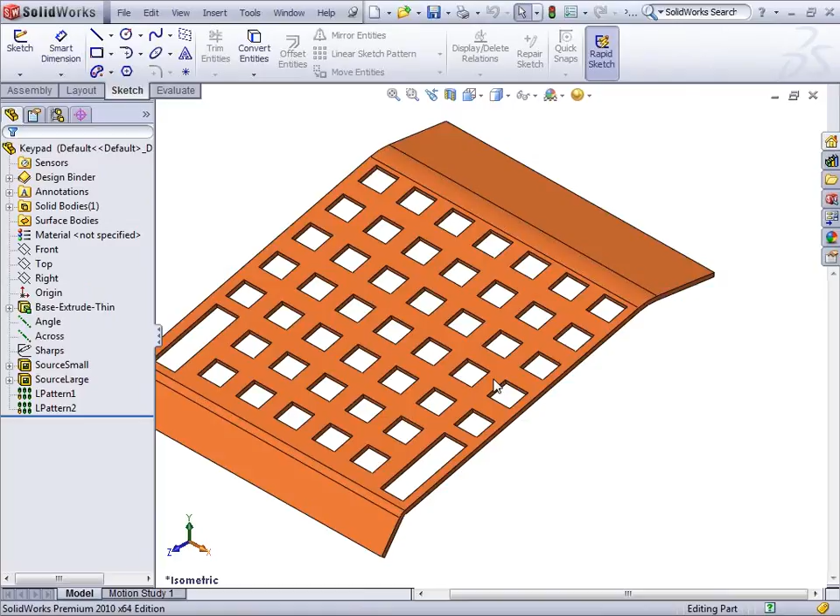And I'll start with a simple example of component patterns. Alright, so I'm going to start with a very simple example. This is one of the exercises from our advanced assembly book. And so if I open up this part, it has two patterns in it. It has a very simple, just one big rectangular hole pattern, and then the more exciting pattern is the one that goes all the way across.

Now this pattern, I'm actually going to edit it so you can see what it looks like. Under here, instances to skip, you can see that it did skip some of the instances, so we can tie right into that and piggyback right on that same pattern here at the assembly level. So this is just a three-piece assembly.

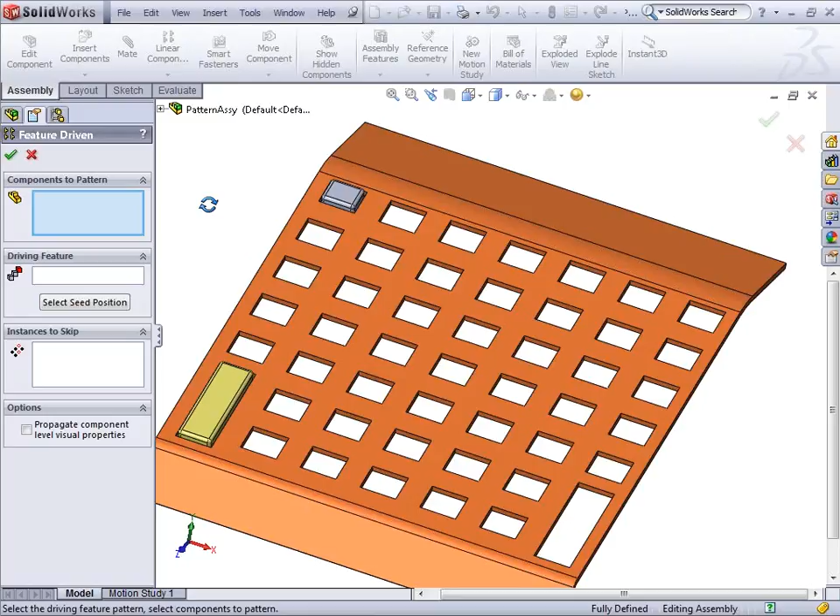Now if I go into assembly, here's linear component pattern. Now here the one that we're going to use is feature driven pattern. So the actual assembly components are going to be tied into the part pattern. So I click on this, and the interface is pretty easy. We're going to pick the component we're going to pattern, and then we just say driving feature. So think of this as driving pattern. Which pattern am I going to tie into?

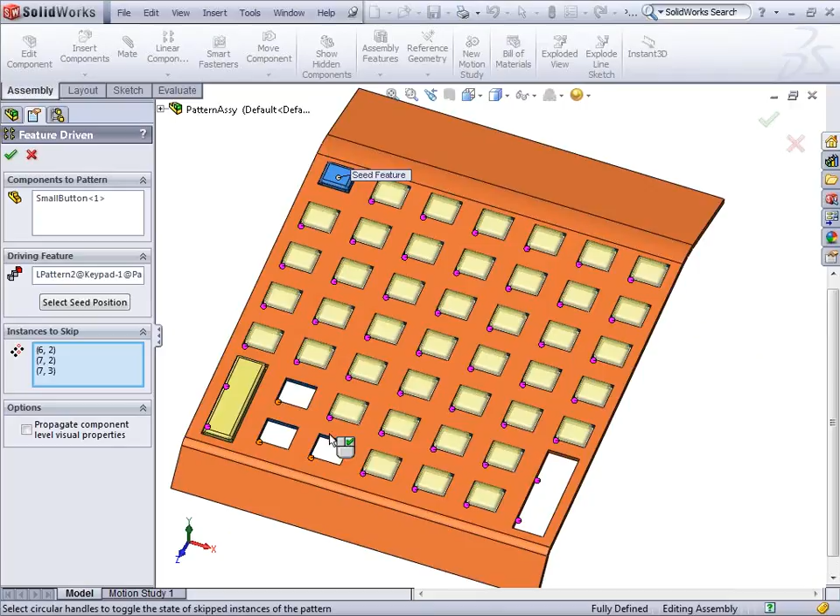So if I pick maybe this face here, you can see that it quickly populates it, and you guys should be able to see that on your screen there. You can see it puts all the little yellow previews. Instances to skip, I can go back and skip a few of these if I want to. So you can see I quickly put that pattern in. So it doesn't have to recreate the wheel. You don't have to have this do all this extra geometry crunching and number crunching. It already knows from the part level pattern what's going on here.

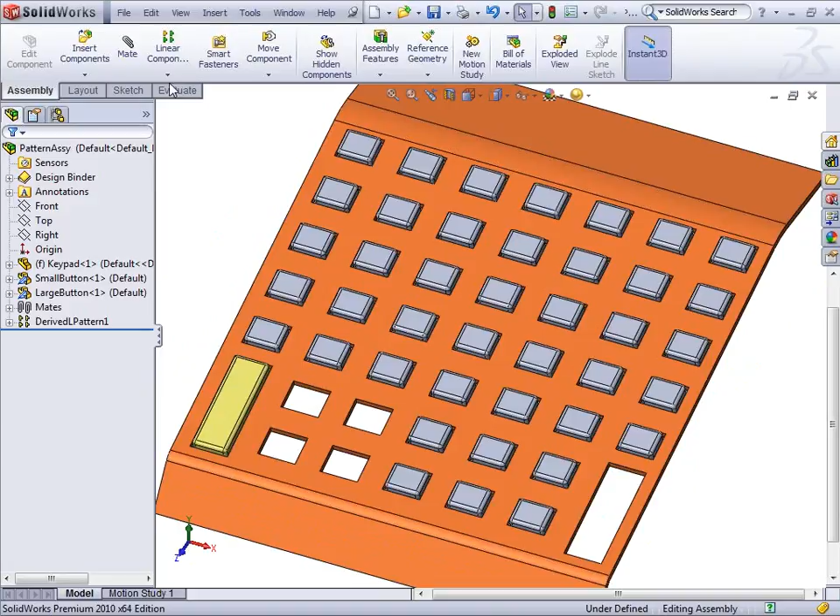So I'm going to show you one more pattern here. So I'll pattern this one. This is a real simple one. But again, I go to linear, feature driven component pattern. So I'm going to pattern this one. And my driving feature, think of this as your driving pattern. So I'm going to go ahead and say OK. And now you can see I just put that other one in there. Now, I can always go back and modify the part, and for time purposes I won't show you this, but if you modify the part pattern, the components would go with it.

So what I want to show you is a more exciting pattern. I'll show you these little gold pieces here, and how to quickly pattern that. So I'm going to go ahead and bring back up SolidWorks. I'm going to open up my version of this little engine here. So here I have these two gold pieces, and this second one here was actually a mirror of the first one. So here's how quickly I can pattern this.

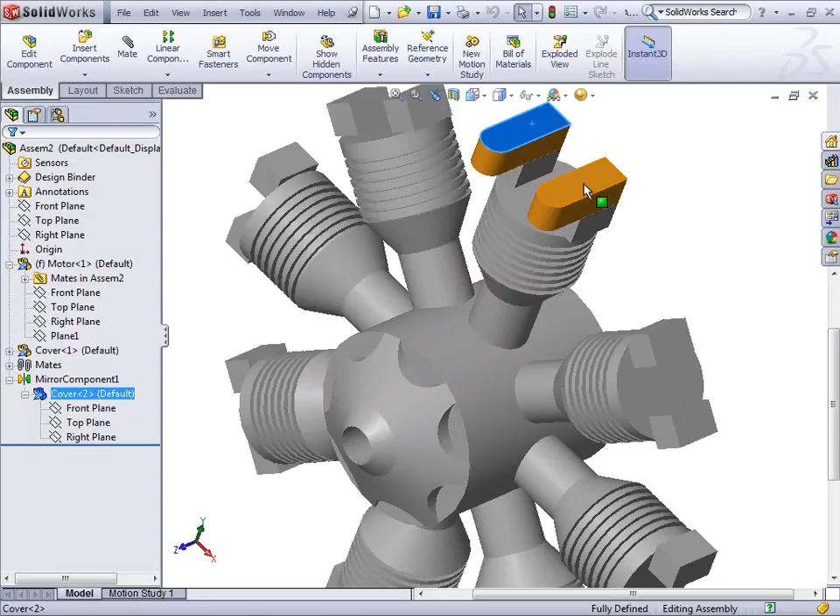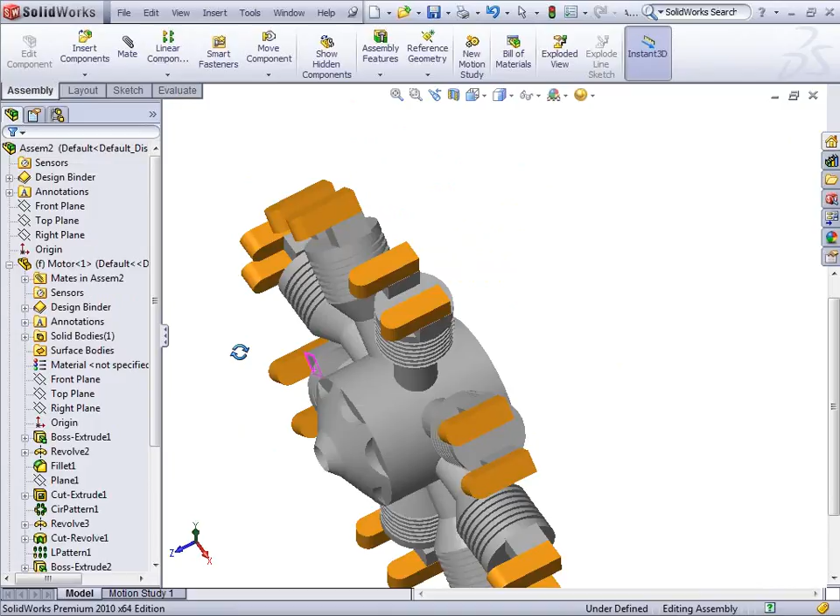I go into linear pattern, feature driven component pattern. I'll go ahead and just start from scratch. I want to pattern this one, and this one that was actually mirrored. I go into my driving feature, and it's going to be one of these pattern pieces. So all I have to do is just pick on one of these, and you can see that it actually populated that and put those in there. So that's a pattern of a mirrored component and the original parent component.

So let me show you that one again. I go into linear component, feature-driven component pattern. I pick my two components that I want to pattern. My driving feature, and if I wanted to, I could pick it off the feature tree too. In this case, I know it's one of these. It's the circular pattern here. So I'm going to go ahead and click on that, and you can see that it very quickly patterns that.

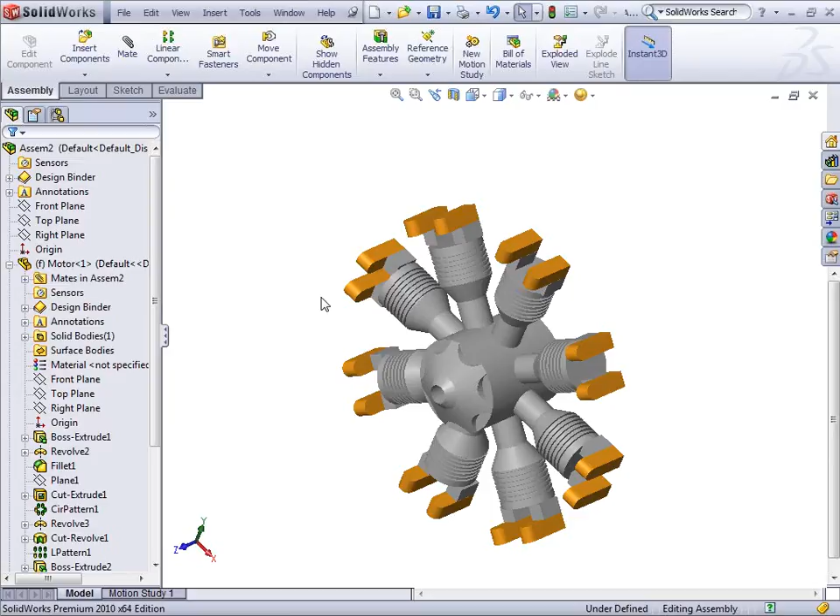So the next thing I want to show you is modifying assembly structure.

Now, what you want to know, big picture stuff, is SolidWorks likes to work with sub-assemblies, not just a bunch of top-level components. It would rather work with sub-assemblies because it will actually rebuild quicker and there's a little bit less mate processing it has to do.

So you can create a sub-assembly by just using this form new sub-assembly here. I'll show you that. You can dissolve a sub-assembly and basically restructure your whole assembly from the top down. Virtual component is something that's new where you can actually break a link to an external file. Multiple sub-assemblies should be used in place of multiple top-level component parts.

For one reason, it saves all the time of you having to recreate a bunch of mates, but also it basically takes a sub-assembly, and when it processes it, it turns it into a fixed entity where it just fixes it in place. It doesn't solve all those mates. It just puts it into place. It just fixes it, and it doesn't have to redo all those mates.

If you turn a sub-assembly from rigid to flexible, then it will solve those mates. But if it's just a standard rigid sub-assembly, it's not going to spend all that time recreating those mates, or in this case, resolving those mates.

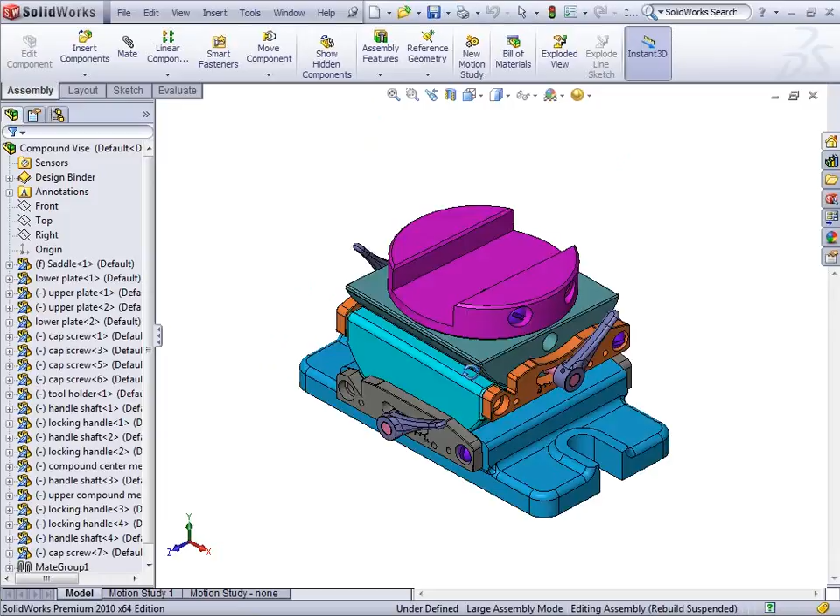Now this one here, it has a bunch of, in this case, moving components I wanted to point out to you. Now one thing about this, under Tools, you can see there's something called AssemblyXpert. The other one you can see there, you can try out, is new, is this Assembly Visualization.

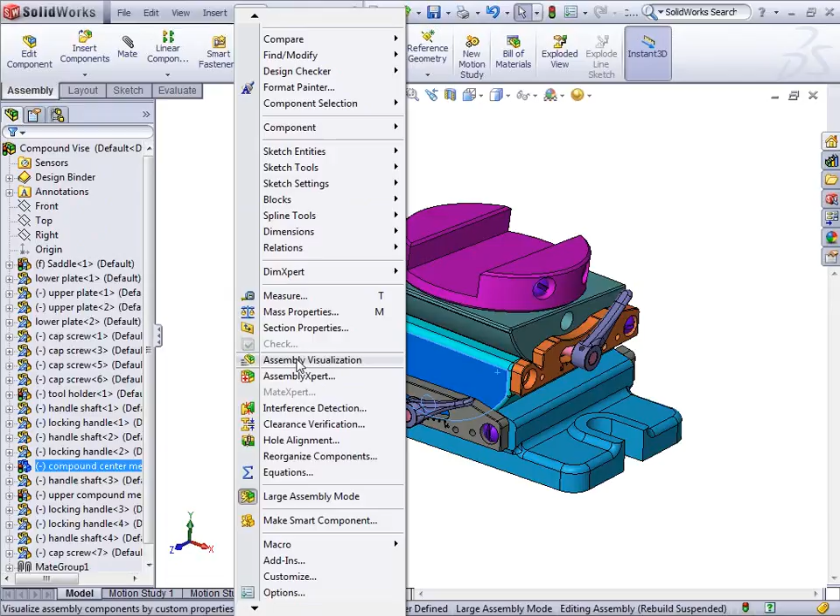So AssemblyXpert, it's going to tell you how many mates there are. It's going to tell me, in this case, the top level mates, which you want to keep that number now. Number of top level components is 21. You want to keep those numbers now. So how you can affect the structure of this sub-assembly is, I'll just highlight one of these. This is a tool holder.

I can go ahead and right click, and I can say, in this case, I'll move down and say form new sub-assembly here. So form new sub-assembly here, and now when I do that, in this case, it named it. I can rename this. So I'll hit F2. Maybe I'll call it the top sub-assembly. Now what it will do is it's going to say top caret Compound Vise.

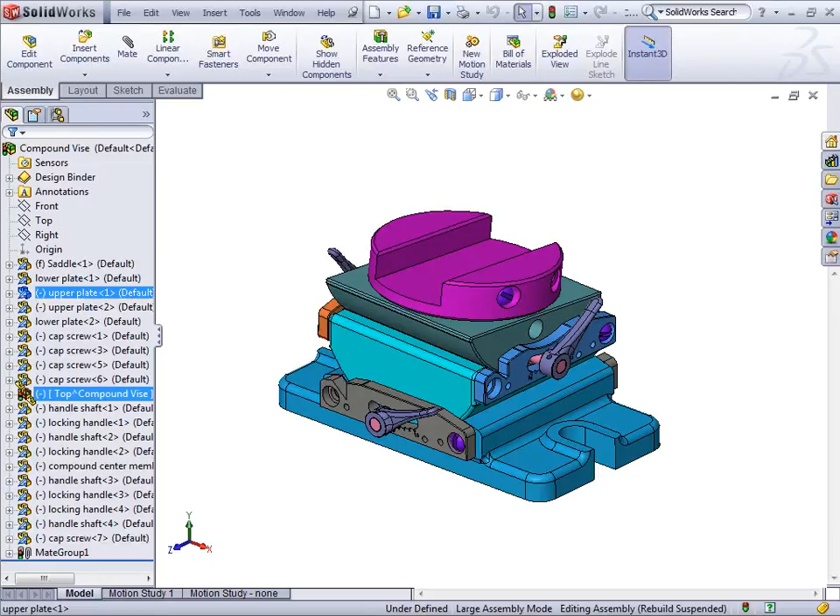So now I made that new assembly, and now I can go ahead and add some more pieces to it. So I can add, in this case, maybe I'll add the upper compound to it. Maybe I'll put the upper plate in there. And you can see the icon changes, so I can actually drag those in there. And then here's the other one I want to put in here. So for time purposes, I'll just put a couple more in here.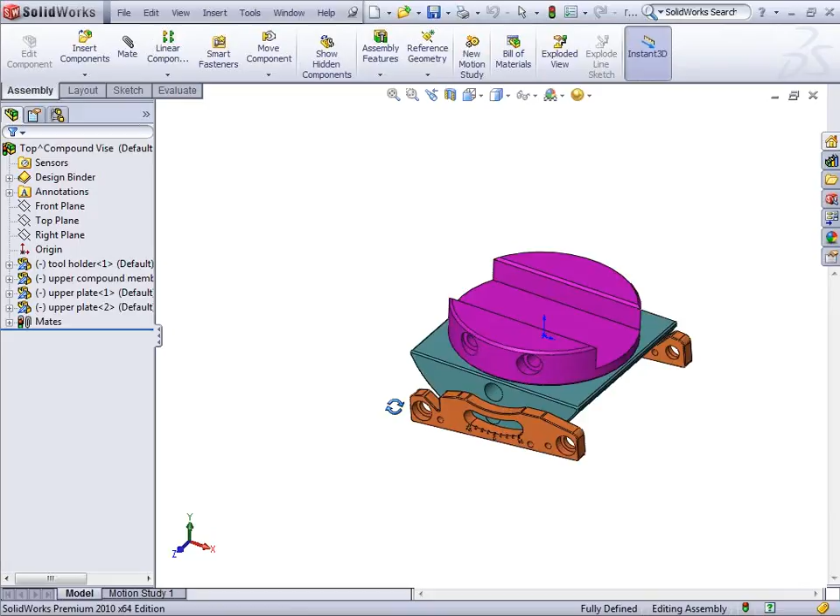So now I just made a sub-assembly. And now if I go into here, I can open this up. And now here is my sub-assembly. I can keep working on it. And now the one thing it did do is it was rotating, and now I can't rotate it anymore. So what you can do, and I can't really show you the icon, but you'll see it change here.

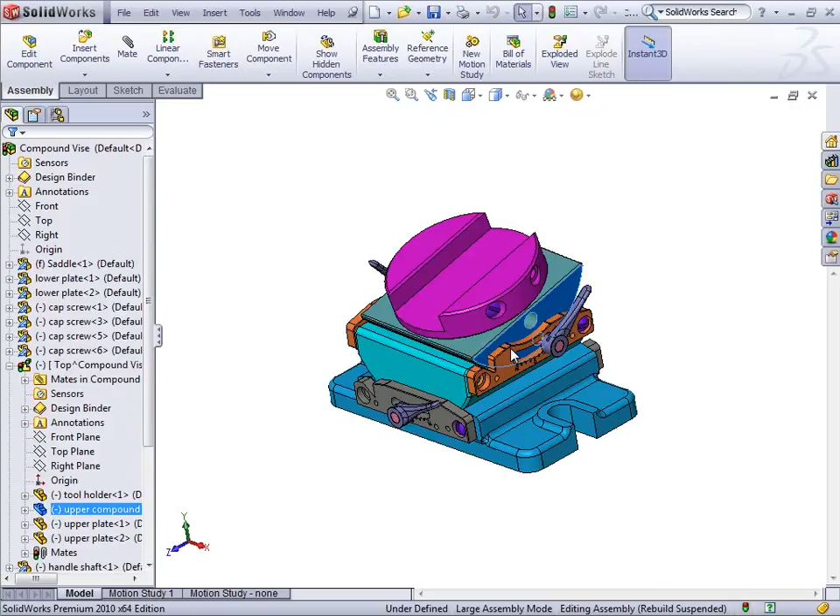I can go into component properties and I can set that to flexible. And now I can go back and now rotate it around again like I did before. And now to go backwards, if you did have to dissolve the sub-assembly, you can go right click on here. Here's dissolve sub-assembly. And now it says, do you want to save that top sub-assembly before you decompose it? So I'll go ahead and say, no, don't save it.

So now I go back into my assembly here, and now you can see there's no subs here. So that's something I wanted to show you. Last couple things to show you is here, if you click on a part, here is the way to make a part virtual.

So what I'll show you here is just talking about best practices. Some of these apply to large assemblies when you're talking about performance, and some of this is just best practices in general. These are geared more towards performance.

Break down your large assemblies into sub-assemblies so it has to do less top-level mate calculations and solving. That's a big thing to think about. When you know you're going to use components over and over again, like a fastener with a lock washer and a flat washer, make a sub-assembly out of that, because then you don't have to recreate those internal mates.

Break down those large sub-assemblies so that you have the multi-user environment we were just talking about. Make simplified configurations of the top level assembly, and I showed you a couple ways of doing that, because you can load those up. You don't have to load the whole assembly, just a simplified version of it for space constraints.

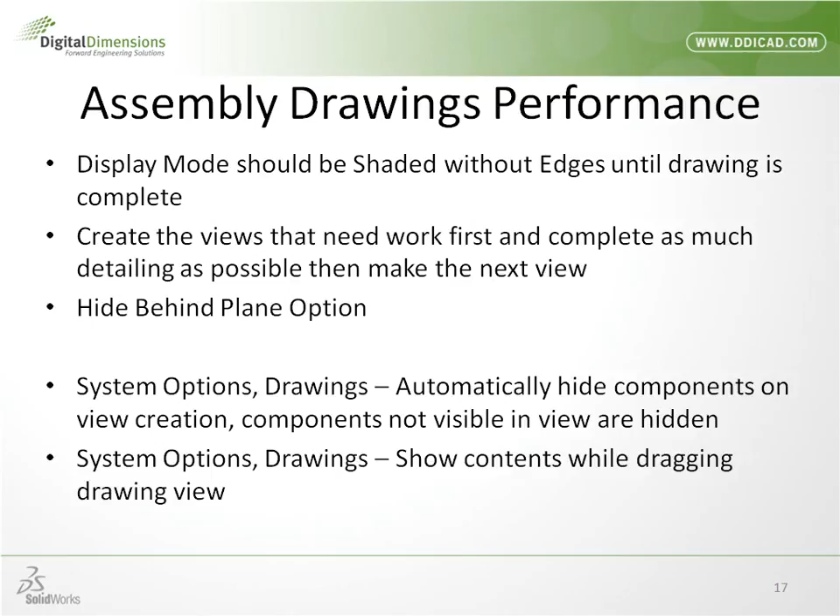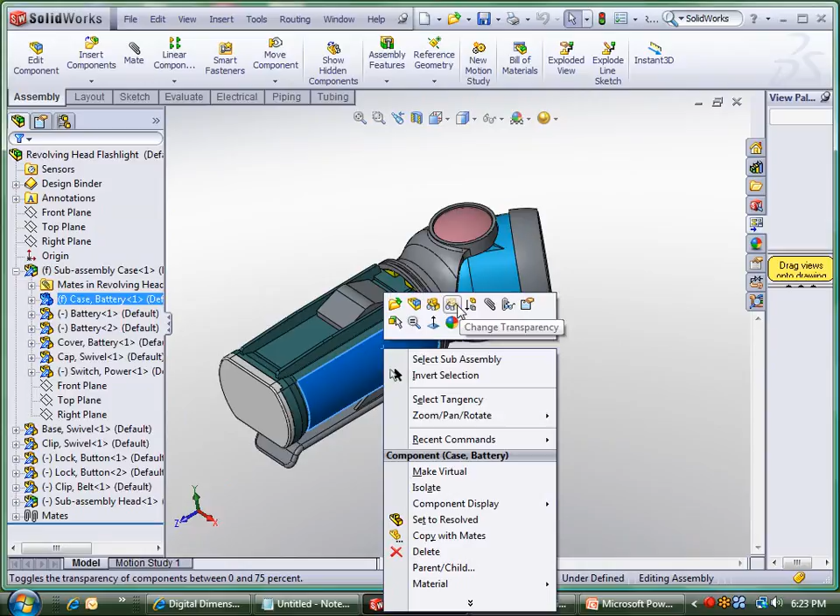So I'm going to bring up this flashlight, and some of you might have seen this if you've taken the Intro Essentials class or the drawing class. You can see that there are, in this case, some batteries in here, there's also the light bulb and the reflector inside here. So there are some internal components.

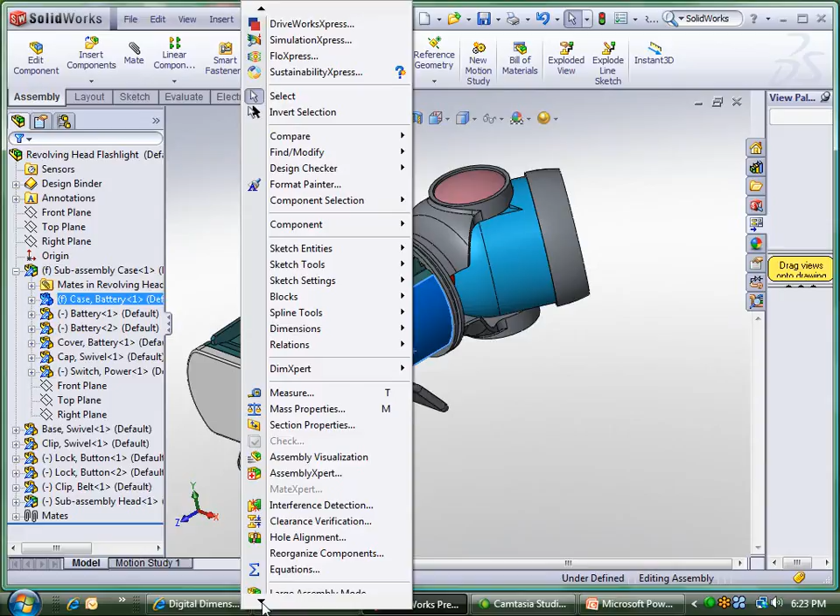When I first make a new assembly, I'll go to one of the settings so you can see what that is. Under Tools, Options, under Drawings, there's one that says Automatically Hide Components on View Creation, so that's one I'll turn on. And then the other one is Show Contents While Dragging Drawing View, which is another one that's going to be probably a little extreme.

Some of you might not like that, so it would be a rare case where you're really having a tough time with moving views around and it being slow. It depends on your hardware and how big your assembly is. But this automatic hide components on view creation setting is one that most people would use regardless of hardware, because it saves computer power by not having to figure out hidden lines for things that won't be shown anyway. So I'll go ahead and say OK to those two.

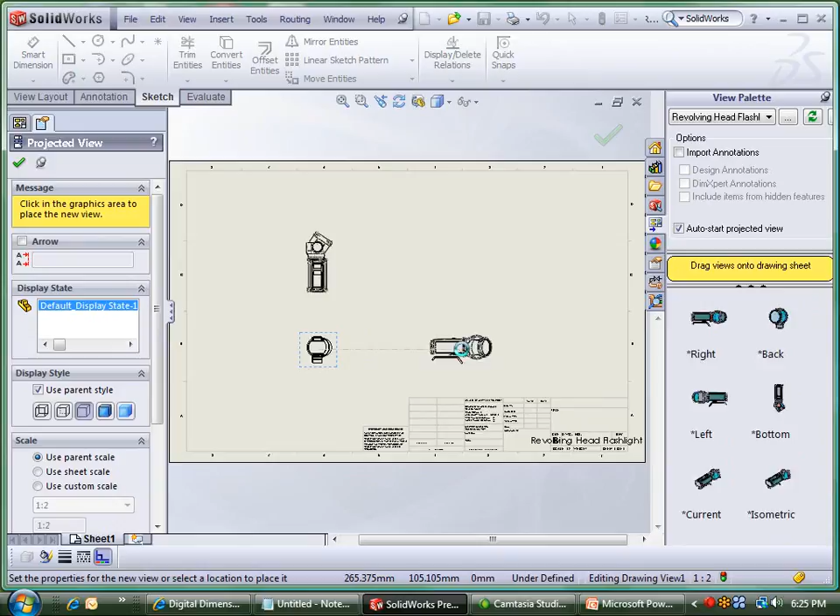So let's go ahead and make a new drawing here. I'll make a B-size drawing this time. I'll scale this up so you can see it a little better. The scale came in at 1/2, so I'll go 1:1 on here.

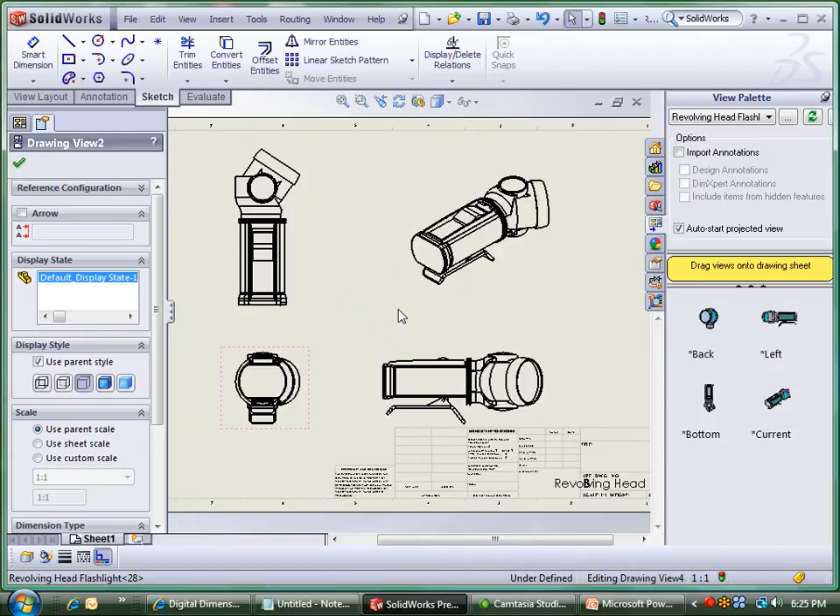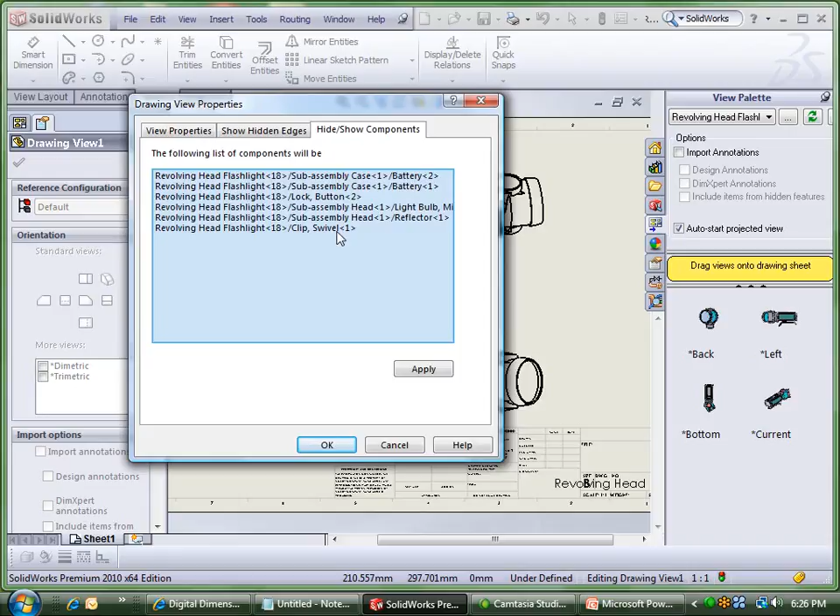So now the first question is, what did that one setting do? That setting, when it came in, was to not create or show hidden components that you're not going to be able to see anyway—in this case the batteries and some other things. If I go into Hide Show Components, you can see that automatically it left out the batteries, one of the locks, the light bulb, the reflector, and the swivel, and that was on this particular view.

Let me show you in this one. If I make this view shaded, you'll be able to see this better. You can see the light bulb is gone there, and that's what was taken out, in this case the batteries. If I go into hidden line visible, you can see the light bulb is gone and the batteries are gone here, and that's what that setting did.

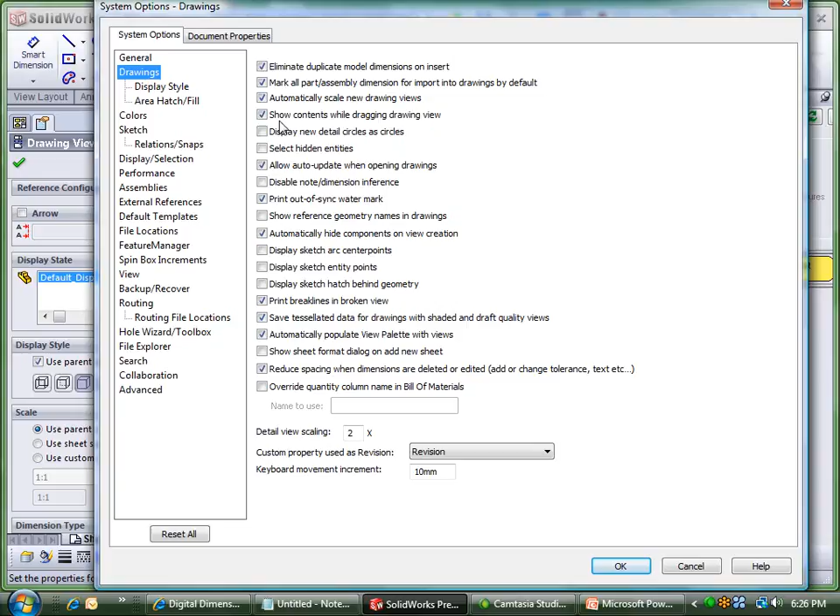And then the other setting is under Tools, Options, Drawings, Show Contents While Dragging Drawing View. If I uncheck that, you can see now that it just shows the box and not the actual inside of it. Now again, that one might be an extreme measure, but it's one that sometimes you guys might use.

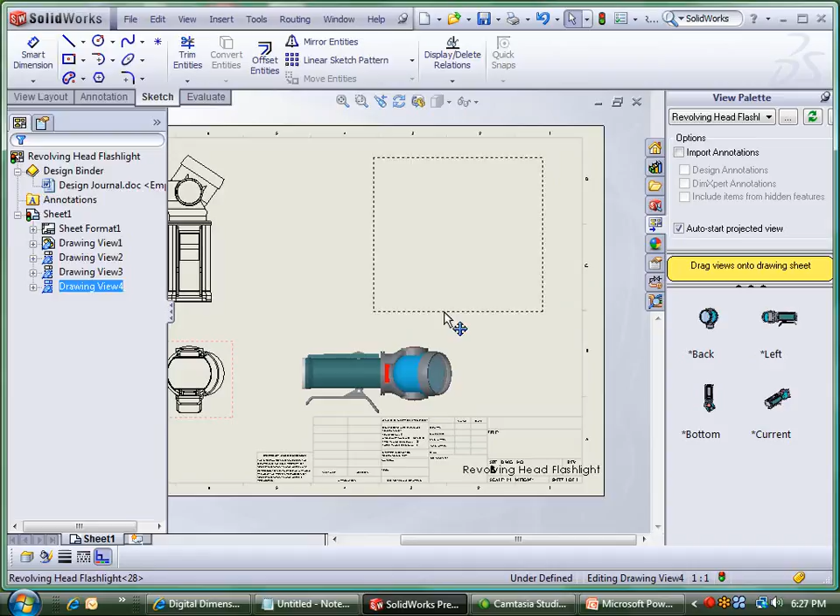And you can see the difference here—it just shows the box. The envelope is what I usually refer to as the view envelope. So in this case, with that setting under Tools, or you can get to it over here under Options—again that's Drawings, Show Contents While Dragging Views—and that's the default usually.

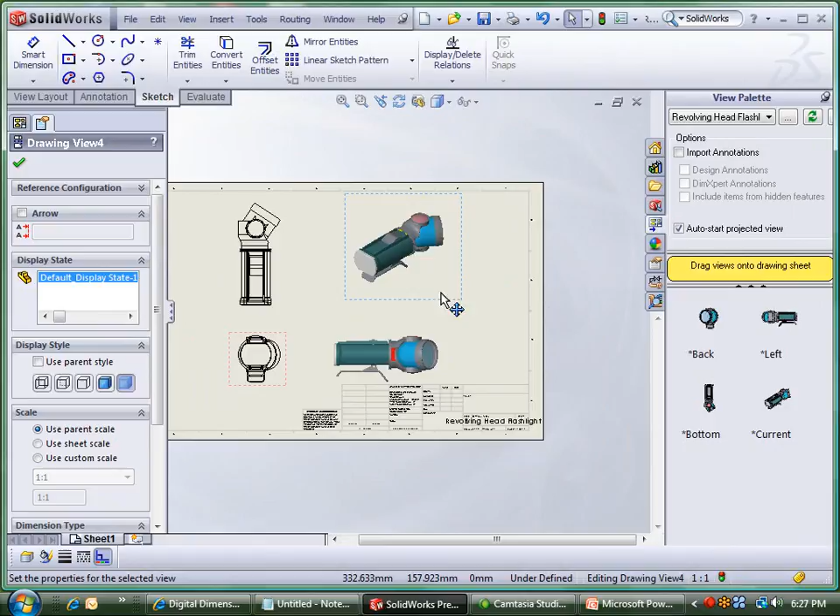One last thing to mention about the drawings is that they will also work in lightweight mode too, depending on how your settings are. So let me show you that.

So I'll bring up a drawing, and this drawing here is one that I've already created, and you can see I have it automatically turning on lightweight, but if not, you can always set that. So this will bring this up, and now the drawing will come up in lightweight too.

Now it said here there's some issues with the units—some of the units aren't matching between the drawing and the assembly or sub-assemblies and stuff like that. So it asks, do I want to resolve them? Or I can say no. I'll go ahead and say no so that you can see the drawing came up quickly. And then also here you can see that the features are there, so they are coming in lightweight.

And if you ever had to turn that off, you can just say set lightweight to resolved, and then it will turn it back off. So again, this is a way to quickly bring up your drawing and not have to wait a long time for it to rebuild or reload.